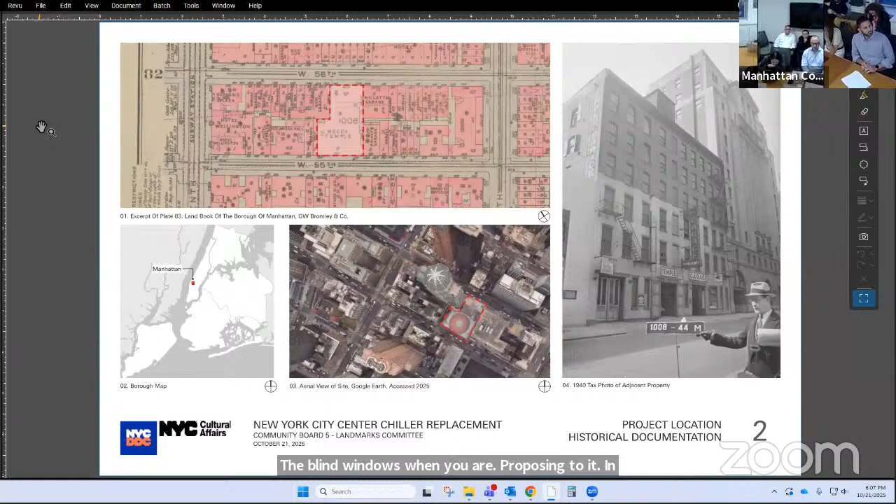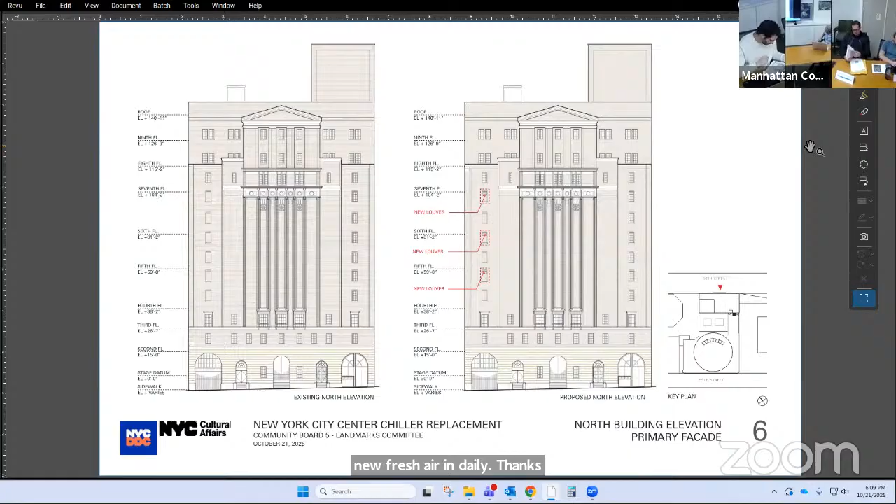On the left is a detail of the product that we selected. It's a fine line louver, also in an effort to minimize the impact. The color of the louver will match the adjacent brick, as shown on the next slide.

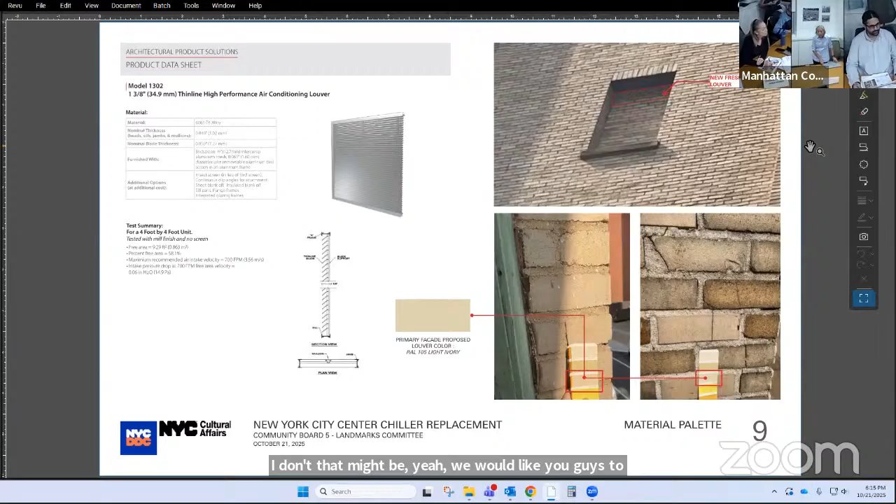But I guess what we could do is have a mock-up and see how it is, if it needs adjustment. That'd be great - if you got a sample and brought it to the building, I'm sure I know you do such beautiful work and love the building and want it to look great. If you put it against it and said, I really like that, I think this is going to work, or maybe we need to work on it - I know that might be something we'd like you guys to consider, speaking for the committee. Certainly something we could do, even if it's not the real louver, we could do a mock-up. Just check it out. Okay, thank you, before we finalize.

Hey, no, this is a lovely presentation. With respect to the color matching that you included here, the RAL - a little louder, please.

Lovely presentation. With respect to the color matching you point out here, the RAL 105 light ivory, will the louver be powder coated or spray finished? That's what we're thinking, powder coat.

Do you have any sense of dimension, like if half of it falls within that shadow line, because that would also perhaps darken the aesthetic, to maybe bring it closer to the brick. The thing is that it's going to change with time, but I do appreciate your point. I think having that shadow line, because it's recessed, would minimize the impact.

I think I agree. Thank you.

I see the mention of an insect or bird screen. Are you guys going to be utilizing that? It says it's an optional feature. Because it sounds like that would be pulled to the facade. No, it would be inside, on the back of the louver. Okay, so you won't see it, just so that they don't get into the louvers themselves. Okay, thank you.

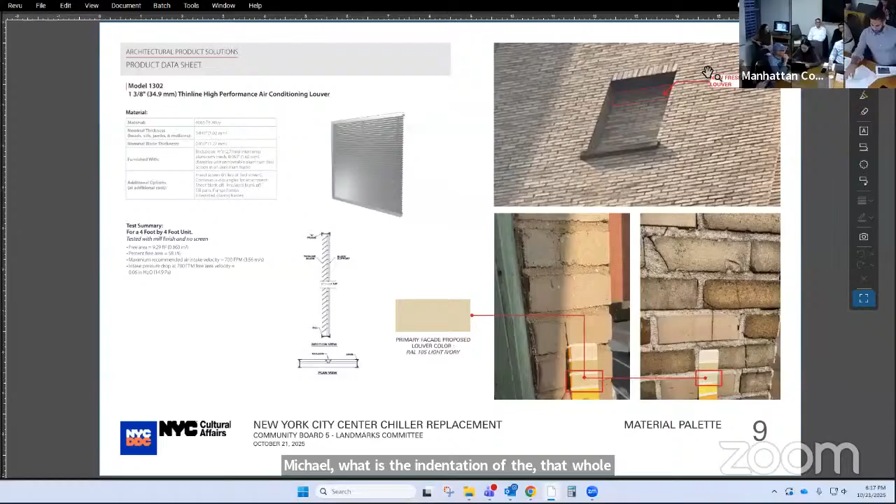What is the indentation of that whole windowless area? How far back does it go before the screens begin? How much brick on the side? How deep is it? I think it's about 6 or 8 inches. It's 8 inches deep. So it's hidden pretty much.

Yeah, it is, and it's going to be the same color. Yes, it's going to be parallel lines.

Which, I rest my case. Henry, well done, hard to argue with that. Any other questions?

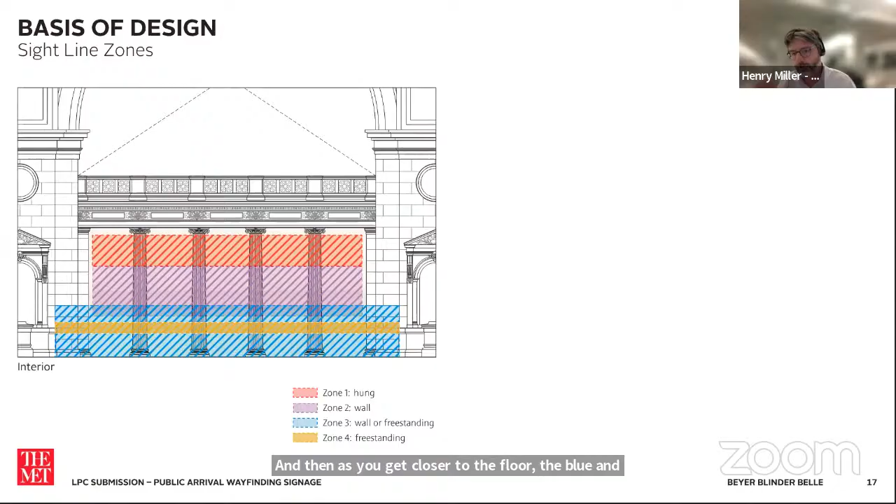So starting the study, we looked at the historic architecture, trying to understand how we can map zones of signage onto it in a sensitive way. You can see the red band at the top, the opportunity for hung signage and banners that you'd see from a distance, and then closer to the floor, the blue and yellow lines for directional signage and more specific wayfinding out of the Great Hall.

We also looked at the historic material we consider the background palette for the work. The Great Hall is Indiana limestone on the interior with a cementitious terrazzo floor. There's some marble and other stone present in various signage, as you can see in this photo.

The existing signage presents a number of different methodologies for anchoring, reflecting a history of different systems at play. We're trying to be very sensitive to the existing stone, so we're not increasing the number of anchor holes or the different hanging strategies you can see here. We're trying to really rectify that.

This is the existing signage plan in 3D. You can see a lot of small signs around the colonnades and around the information desk at the center of the space. We're trying to figure out a way to distribute those more carefully and provide information where it's required. This is the existing plan, and you can see a lot of that signage grouping around the entrances and exits to the Great Hall.

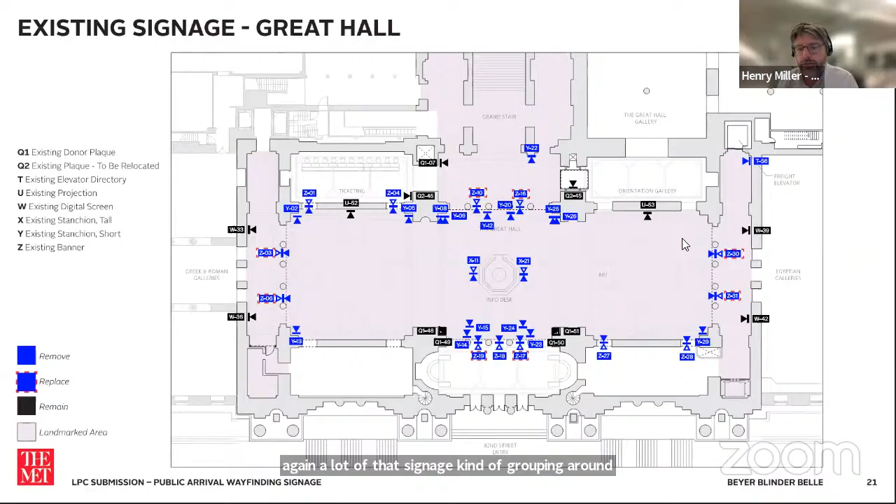And then at the information desk, we're also supplementing the visitor services with digital touch screens, two of those, which would allow users to do a deeper dive into the current offerings, the map of the museum, different languages, and be fully accessible with the listening loop, et cetera, for the public.

Getting a little bit into the specific signage types, which we call the family of signs. We're trying to produce a system of signage that works together, but also works with the architecture. So you can see here that family for the Great Hall.

Quickly from left to right, you can see the touch screen at the information desk, the pylon, the hung banners, and a different variety of banner that's longer and narrower, which works with the return portals in and out of the Great Hall.

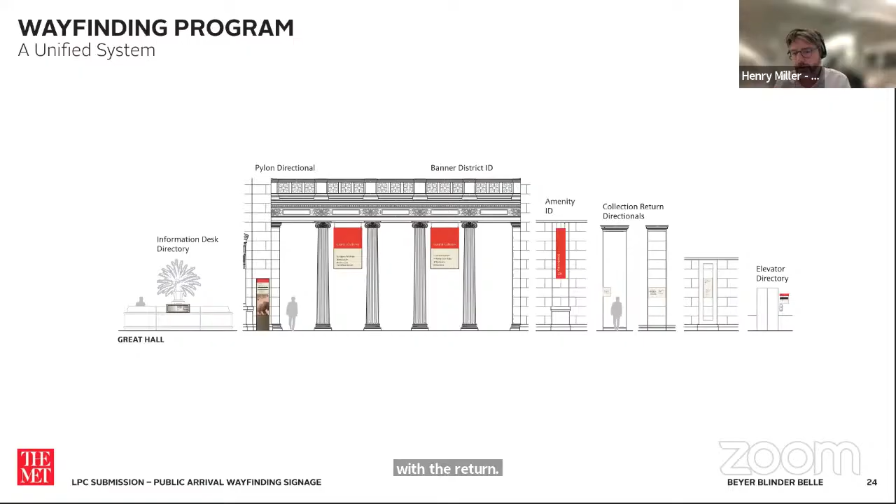On the right are the smaller directional signs, carefully located at stone joints to work within stone proportions. Those are really to help guide you on your way out of the Great Hall into the museum.

Some of the proportions of the banners and signage show how we're trying to hit stone coursing, for example the height of the pylon for the long narrow banner, as well as working with the existing architecture at the information desk. Similar with the directional signage.

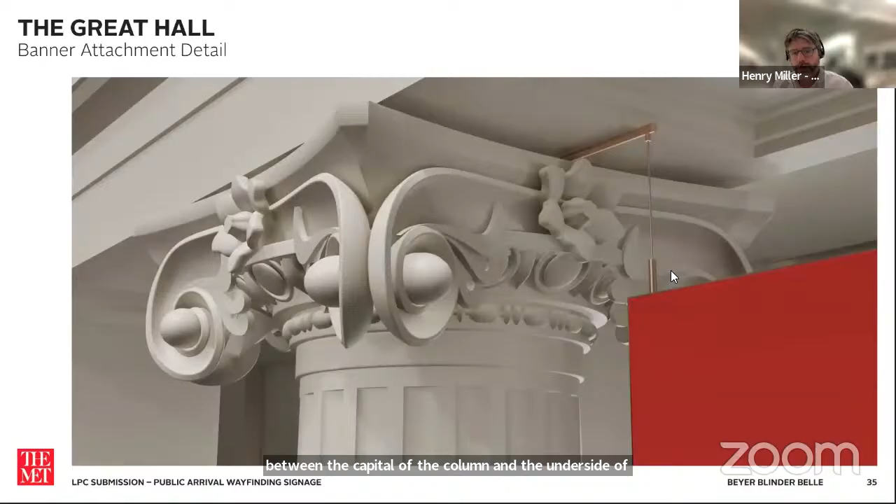To the attachments I was describing, there's a number of them currently being deployed. We're trying to be very specific about how we will anchor things. This is a great opportunity to hang the banners by finding a gap between the capital of the column and the underside of the frieze, where we're able to get some hardware integrated as minimally as possible. We're proposing a frame to these banners, which would be that bronze I described earlier.

We're also looking at a potential alternate, a subtle backlit version of this banner, which we're testing as a way to further let the banners pop out in the very busy Great Hall.

This is the existing directional signage. You can see a number of different types. We're hoping to really put a lot of that information into the pylon.

This is showing the pylon in more detail, how we can deploy it with a lot of specificity about which way to go, but also with a digital display alongside static signage, which would be able to be updated with the latest special exhibitions and whatnot. That would allow the museum to switch that out without needing to switch the signage type.

The triangular form works well within the terrazzo patterning of the Great Hall, and it fits into the corner of the stone pier. This is some detail on how that would be put together.

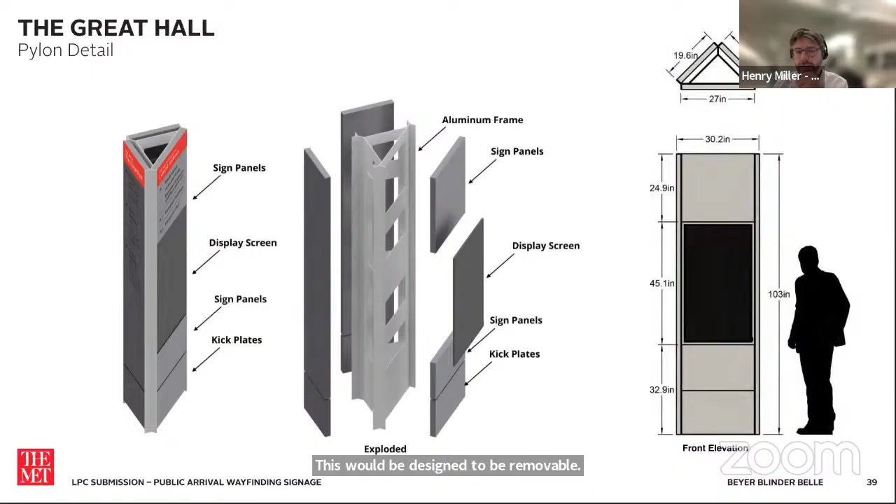This would be designed to be removable, so it would be anchored to the floor, and if the Met needed to take it out, it could without damage to the surrounding.

Similar with the information desk touchscreen, you can see that being deployed here. That would also be removable. This would be supplemental to the existing visitor experience staff, but it would provide the opportunity to really go deep into what's available in different languages, etc. So adding information here without needing to add a bunch of signs.

For the directional signage types, you can see here, for example, we're matching the anchor points of this sign to the grout joints, which is the appropriate place to get the anchor in without going right into the surface of the stone. So we're being cognizant of trying to be as minimally invasive as possible.

And finishing out that family. Part of the work, we're also relocating the World War II plaque to a similarly located wall, a limestone wall, one of the arches.

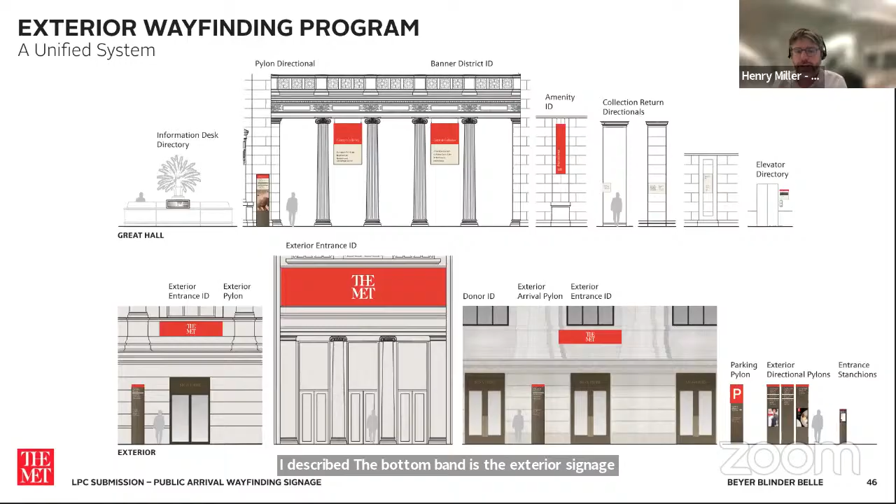Going now to the exterior, the top band is the interior signage family I described, and the bottom band is the exterior signage family. A lot of the same logic is here with the Met red at the banner level, and then more specific directional signage down at the eye level of the visitor.

Same story at the exterior in a lot of ways, a proliferation of different signage types, not very efficient in being able to deliver information. You can see all of those signs here. Our proposal is to really reduce the number of signage types and signs, and put them in the right place so they can do the job they need to do.

That will include providing some pylons out in the plaza to help signal the new entrances at 83rd Street as well as at 81st Street. We'll see as we go through why we think those signs are very important.

Again, similar to the interior, a lot of different sign types at the exterior. We're trying to clean that up and make it more systematic. A similar logic was applied at the exterior to understand where in the architecture are the right horizontal bands to apply signage, both hung and down low. You'll see the exterior elevation on the left versus the interior elevation on the right that we saw previously being a similar strategy.

This is again showing the various signs at the exterior, going into each of the conditions in a bit more detail. You can see the banners above the doors, the opportunity for donor recognition potentially, but more importantly, the pylon types both out at the sidewalk and at the entrances to help direct people to the specific amenities beyond.

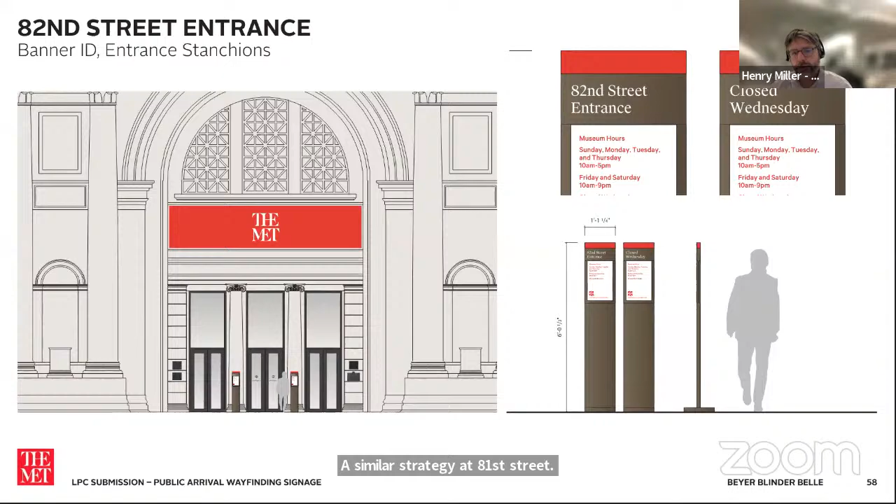Part of this also, similar to the interior, is to be very considerate about how we're anchoring the signage to try to make it as minimal as possible, to anchor into the stone as carefully as we can. You can see some of the existing conditions here with a lot of exposed hardware and ropes and whatnot. Our proposal would be to put a lot of that structure behind the signage and to mount it as carefully as we can so that you're not seeing a lot of the hardware.

So this is the proposal for that, with the anchor points tucked around the corner in the gap between the banners, so they're not as visible.

Looking at some of the signages and pylons that are currently there, there are some existing illuminated kiosks at the curb, which proved to be too far towards the street for the pedestrian. Those are probably more for motorists. There's also some blade pylons present at 81st and 83rd Street, which we're looking to update and unify.

This is the exterior pylon. It's similar in function to the interior pylon. We're picking up on that triangular shape. This would provide also directional signage to each of the entrances, clarifying what you can expect to find there, and also a digital display to provide specific information on what's new, what's the latest exhibit, etc.

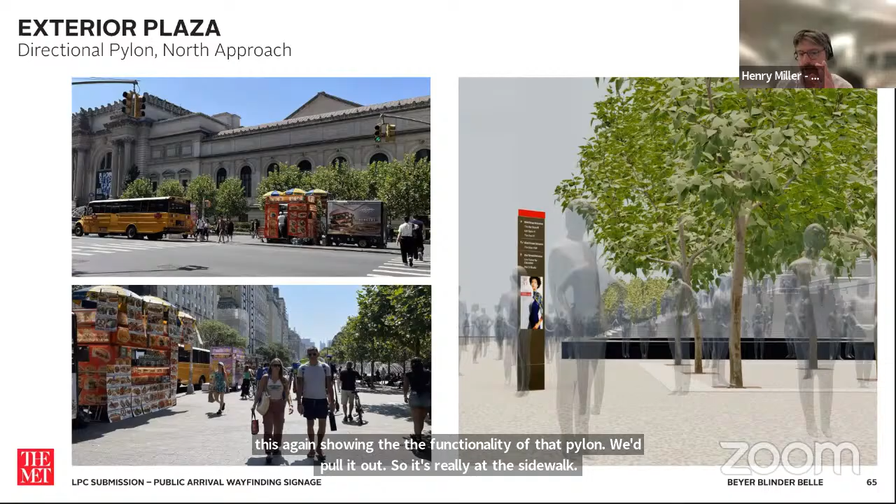Those digital displays would be pointing actually towards the museum, so they wouldn't be something that you would see from across the street, for example. This, again, shows the functionality of that pylon. We'd pull it out, so it's really at the sidewalk and something you're able to see before you get into what's often a crowded area right around the entrances.

How you might then be directed towards 81st Street, similarly at 83rd Street. And then finally, to unify the whole family, we're proposing the replacement of the public parking sign, which is down at 80th Street, with the sign on the right. That would unify the whole exterior signage family in concert with the interior.

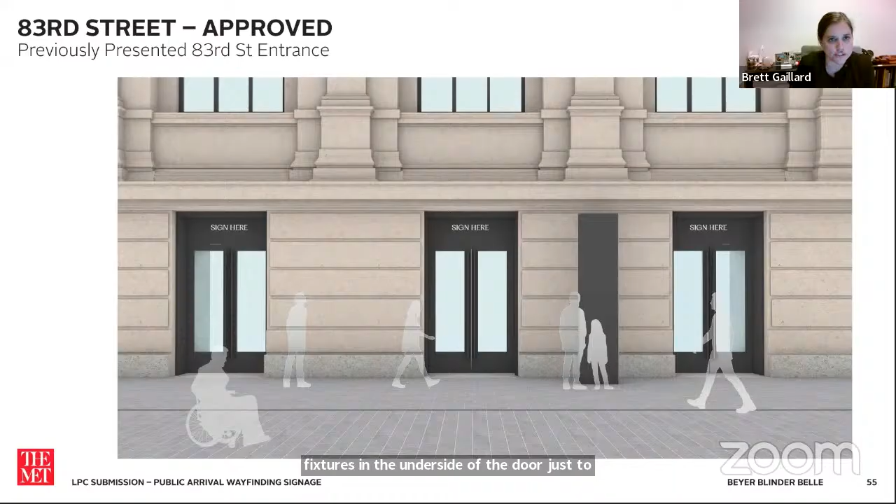There is facade illumination designed to illuminate some of the facade signs, and that would be all we require. Henry, I could add that over the new 83rd Street doors - maybe point to those three doors. When we got the doors approved, there are light fixtures in the underside of the door just to illuminate the signs above, but beyond that we're not changing the lighting strategy in the plaza, which was very well thought through about a decade and a half ago. Thank you.

You mentioned some of the banners being internally lit - can you talk more about that? Yes, that would be at the interior, the banners hung between the columns. It's something we're exploring - we're still carrying the option for no internal illumination, and we're doing a mock-up, so we're not sure yet which direction we'll go. But it's a big space, there's a lot going on, so we're looking for ways to make the signage as clear as possible. That's still in our potential toolkit.

Should we consider that as part of the application? Yeah, I think we talked to Landmarks about this because we haven't decided yet, and we'll decide by the time we have our public hearing. We wanted to present both options and get feedback from the community boards because we're still considering this internal illumination. There's operational and other considerations, and we want to see it in the space before we decide how we feel about it.

One more - any of the digital signs, aside from the patrons one you mentioned, will there be any non-museum related advertising? No, definitely not. We really just try to use them in a static way so we don't have to print posters for every exhibition and put it out there. So the idea is that it's talking about what's happening at the museum.

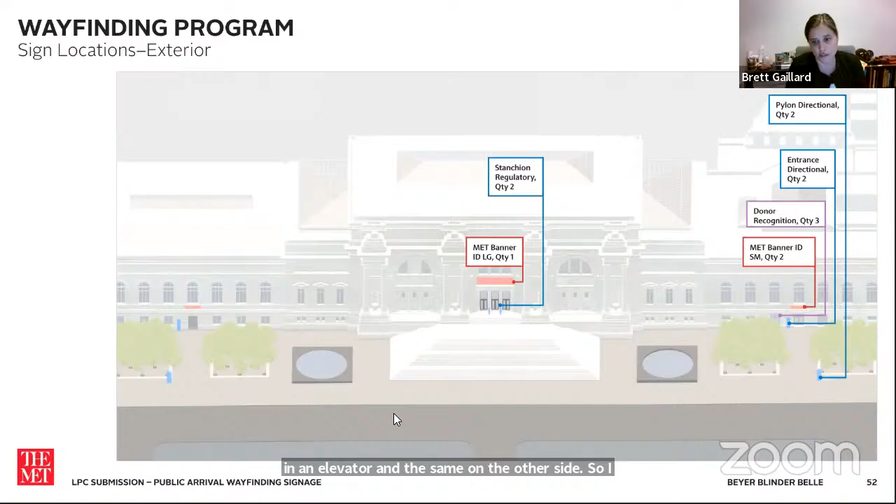So that's why we have the pylon that catches you if you're walking north-south, and then signals that you can go west and there's a door there, so people don't walk by this new entrance and understand it's an accessible entrance too. If you're in a wheelchair or have strollers, you realize you can hang a right there and get in an elevator, and the same on the other side. I don't know if this is the image you wanted to see, but this is essentially what we're proposing over the four city block facade.

No, very helpful. Thank you. Great question, I had the same question about the phones.

Other questions? I think we touched on the system being flexible and adaptable, with elements like lighting of the interior banners, and ultimately how crowds will interface with the pylons inside. Do you envision any kind of pilot or test rollout before everything goes in the ground and signs go up in the visitor center?

Yeah, we kind of do everything here as a slight rollout just because of the scale. Our strategy is to really focus on the new entry and the Great Hall, and the signs that are absolutely required at the base to get people where they need to go. Then we layer on the smaller scale directional signage that Henry described, that tells you can go from this gallery to that gallery. The other reason we roll this out is we need to make sure when a sign points you somewhere, there's another sign somewhere along that journey that gets you to where you want to go. When you're in the Great Hall, you can be two blocks away from the wing you actually want to go to, so just one sign in the Great Hall isn't quite enough. So there will definitely be a phased rollout of this.

I think we see the pylons in a way as a bit of a pilot. We're only proposing to do two or three at the beginning, probably a maximum of three overall, maybe we even start with one. We haven't decided yet, but we would put it in the space and see how it functions. We've done things at the Met, like putting a cone down in the Great Hall to see what people do, and it really changes the behavior in the Great Hall, especially when you have 33,000 people in there at a time. So we will absolutely test it out, but we think this is the starting place, which is kind of why we're proposing this as the framework.

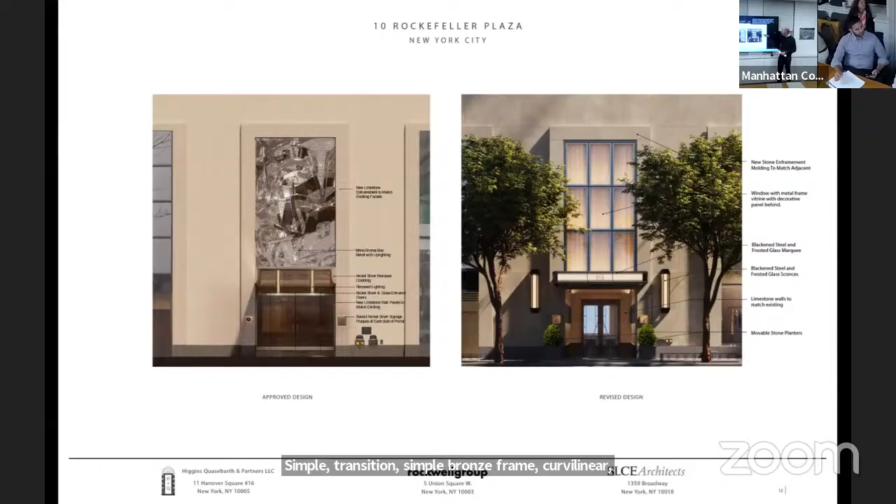This bronze framed panel system with this mesh - we have samples here, happy to pass them around. It's a metal mesh that reads almost like fabric behind glass, and there'll be uplighting to give it a little light. New blackened steel and frosted glass sconces on either side of the entry, and small signage flanking the main entry.

Materials - we have them here, happy to pass them around. Limestone within the entry and granite, bronze doors, blackened steel for the marquee and lighting, travertine across the floor. Materials one would see typically throughout the center.

Comparative sections - this is what was presented previously and approved, and where we are today. This marquee extended out about 2.5 feet further than what's being proposed. You can see this rendered elevation here: limestone panels, sconces on the inside, and granite across the base.

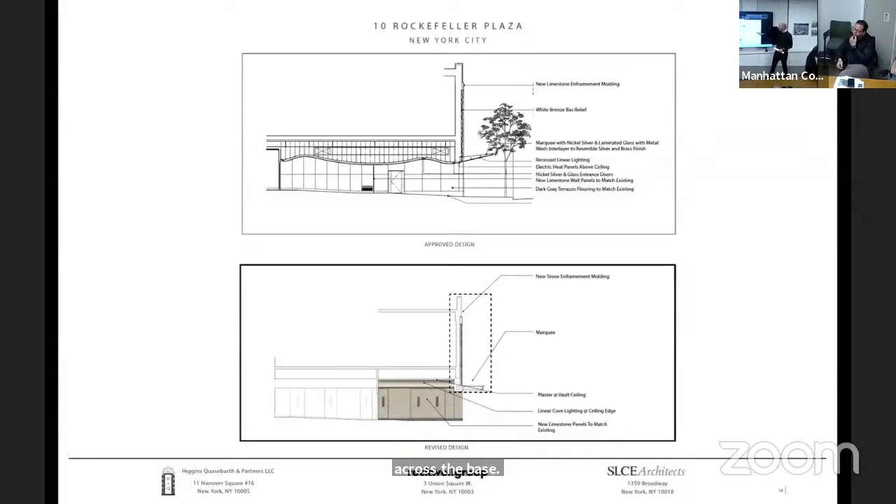I'll mention two comments the committee had back in 2023: one was about the projection of the canopy, and the other was about the undulating ceiling. Both things the committee wasn't happy about have actually been changed. It's now a simple narrow vaulted ceiling, and the projection of the canopy is about 2.5 feet shorter than what would have been previously presented.

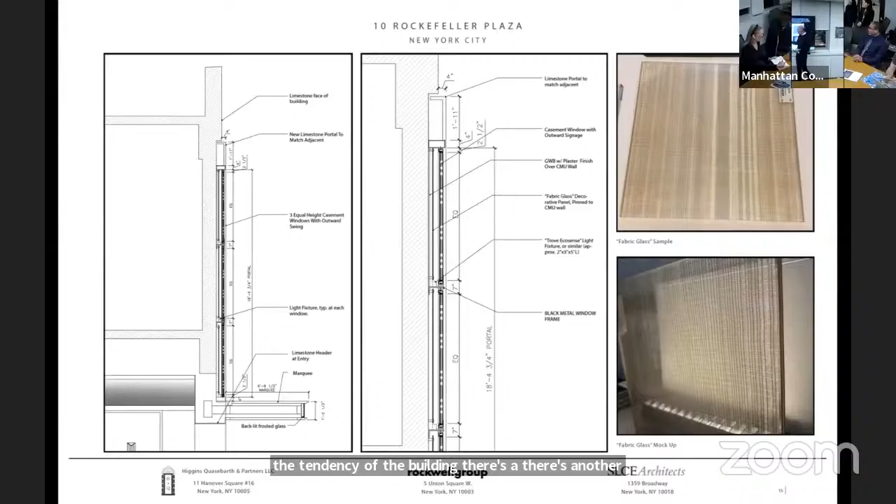Some detailing on that glass panel with the fabric glass you see passed around - it's set into a metal framework. Because of the tenancy of the building, there's another tenant on the second floor with a masonry wall directly behind, so we have very little depth to work within. This screen, or mesh, almost implies depth, but there really isn't any.

It's only about 8 or 9 inches of depth, but there'll be this glass system with bronze mullions. It will be operable to allow access for cleaning, and there'll be very small LED fixtures that just provide a little glow behind this mesh. That will all sit within this very narrow sandwich.

An overall elevation, just to put the work in context of the building. This area is retail use right now. Everything down here had been garage and is now back-of-house office space for other tenants in the building, although the garage still remains down here.

Some details for the doors - bronze doors, deeply set into the entry vestibule, done in statuary bronze. A reflected plan for the marquee itself, extending about 6.5 feet off the face of the building, with coffered detailing, a blackened steel frame, and a limestone fitter.

Comparative plans - again, this is existing, this is what was presented previously and approved, and where we are today. Very similar to what was presented previously, with some changes in materiality. The walls will be clad in limestone with granite, dark gray terrazzo across the floor, and a plaster ceiling.

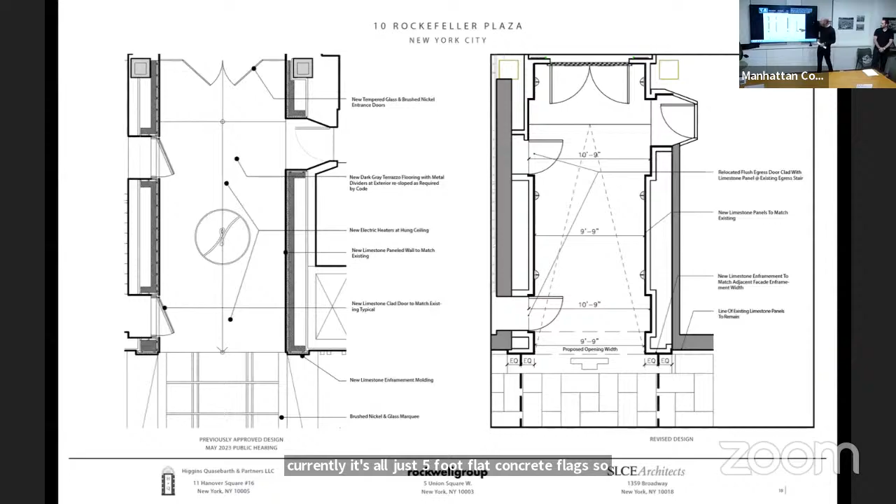I'll also point out that we're proposing a simple bluestone pattern out in front of the hotel. Currently it's all just 5-foot flat concrete flag, so this draws a little attention to the main entry of the hotel in bluestone. Here's the detail of that treatment. In about 2000, the commission approved and installed this throughout the center.

You see a lot of this bluestone paving within the plaza roadbed, at the corners and the individual entries to the buildings. Many of them have bluestone in different patterns, and some granite.

This is a distinct paving within Channel Gardens, which really only occurs there given the prominence of that place within the center. But in this context, particularly on the 48th Street side, where it's just concrete, we're integrating a little bit of stone into that to call out the entry.

This is a rendered plan just illustrating the bluestone. We're proposing to enlarge the tree pits, which will help the two trees currently out front of the building, which are in tree guards that are really too tight. So enlarging the tree pits, bluestone pavers, and then the terrazzo leading into the hotel entry.

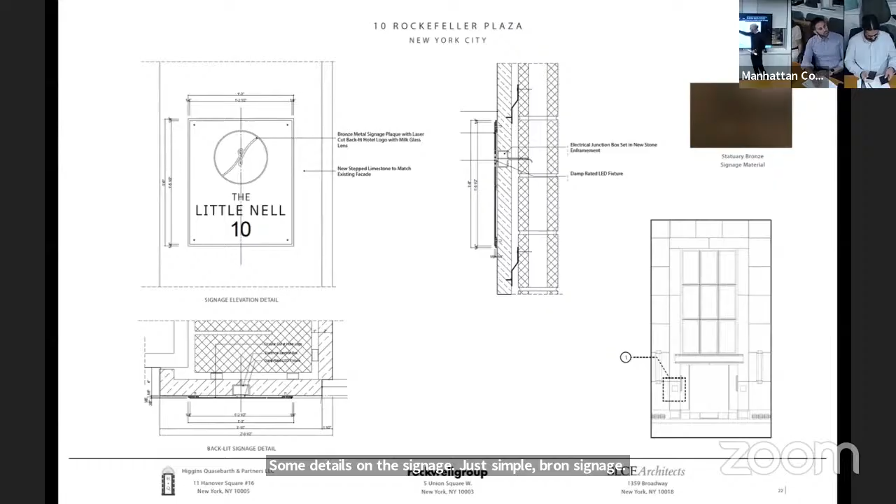Some details on the signage. It's just simple bronze signage. There's a cutout here with a light source behind it, so it'll just be a glow coming through that solid bronze for the hotel logo.

Similarly on the opposite side - the first sign flanks the entry, and the second sign is very discreet. The dimensions are about one foot, six inches by one foot three inches - so 18 by 15. Very discreet signage on either side of the hotel, all in statuary bronze.

Just a few photographs around the center. I mentioned that the base of 10 Rockefeller Plaza comes down to the building with a lot of glazing. This is the main entry to 10 Rock, these tall glass panels, and you can see the corner detail here, these large panels of glass.

And even to the east at One Rockefeller Plaza, you have this storefront infill. So the proposal above this canopy is kind of riffing off on some of those historic details that one sees throughout the center.

This is the 6th Avenue side, at 1230 Avenue of the Americas, basically the opposite side of this elevation. Again, this very light glazed system at the base of the building is very different than what you see elsewhere around the center - similar to this, where the limestone comes down to the street. This building has a much lighter feel at the base, so we're trying to pick up on that.

The last element, just touching on the marquee - historically the center was built with marquees since it was an entertainment complex. 30 Rockefeller Plaza had marquees on either side of both the 50th and 49th Street sides. What was then the Newsreel Theater at 50 Rockefeller Plaza had this very brightly illuminated marquee on the north side of 50th Street. You can just make out this marquee here, the one at 30 Rock.

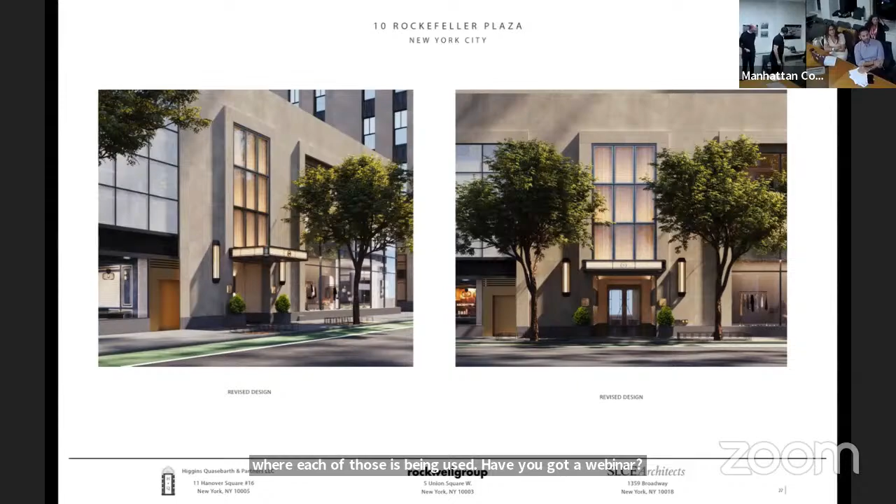I'm gonna let Matt do that since he's designed this, with his team. If you want to go to the material sheet, I think that's... you have to pass these around too, but these are the two samples.

So the black and the statuary bronze, I think the bronze is kind of the highlight that we're trying to use in certain ways that really highlight either the signage, the light fixtures, or the marquee itself. When we get to the window vitrine light box, we're doing a few different versions of how we can use the metals between the dark metal and the light metal to make this feel a lot thinner, a lot lighter, and a lot more graceful and respectful to the center.

So there's a mix of the bronze and the black finish. Black finish mostly on the exterior of the marquee, and then once you get underneath on the coffers, that's where some bronze comes in, on the light fixtures themselves, and then also on the two signage plaques here. Once you get into the tunnel, we do have some decorative lighting as well, that's also the bronze that we have, and then back into the doorway. So really the bronze plays more of a role when you're at eye level, and the black is more for marquee and above.

All right, thank you. More questions?

Could you just put those where they represent all of them? All these, yeah, and that one, and the glass, just so we can have... Sure. So the cast glass or the frosted glass is here for the marquee. It's for the two light fixtures as well. And this will take on a little bit of a different look with the color temperature lighting.

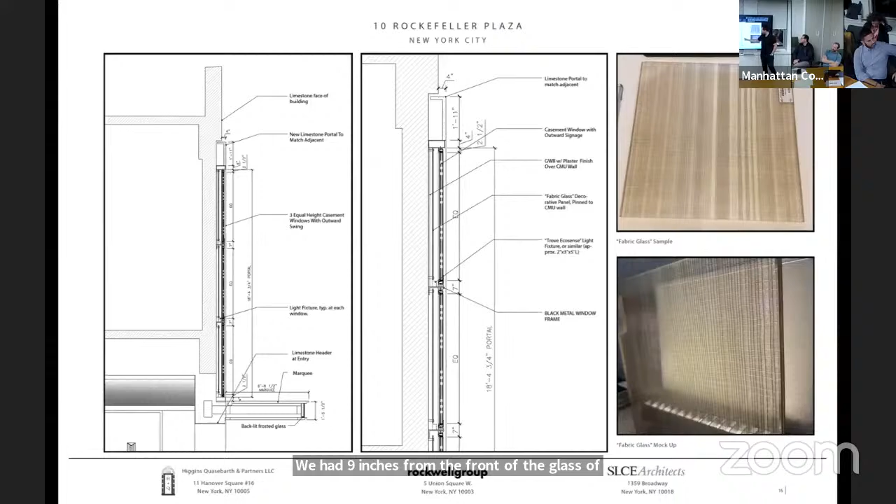How close is that plaster to the glass? Plaster to the glass, so this whole sandwich, from the front of the glass to the CMU wall, we have nine inches. From the front of the glass of the casement window to the front of the glass of the fabric glass is about 4.5. So it sits in between. Can you show them? Yeah, so it'll appear like this, and this is approximately that sandwich, so I'll give you that, it's just enough, we're working with the limited space that we have. But it is set back from the casement windows. The lighting is coming from the inside, and the lighting will be from the inside, yeah.

Just a reminder to address all the questions to the chair, but I just have to back up for a second to clarify a question, potentially an ignorant one. Is this entrance going to be for both the hotel floors and the office floors? No, it will remain just for the hotel. So the main lobby will remain an active lobby. The elevator lobby on the inside is being divided, so the eastern cars will remain office and the western cars will be for the hotel. So all that's happening sort of inside, past the main historic lobby. Got it, so the people walking through this entrance are only hotel guests.

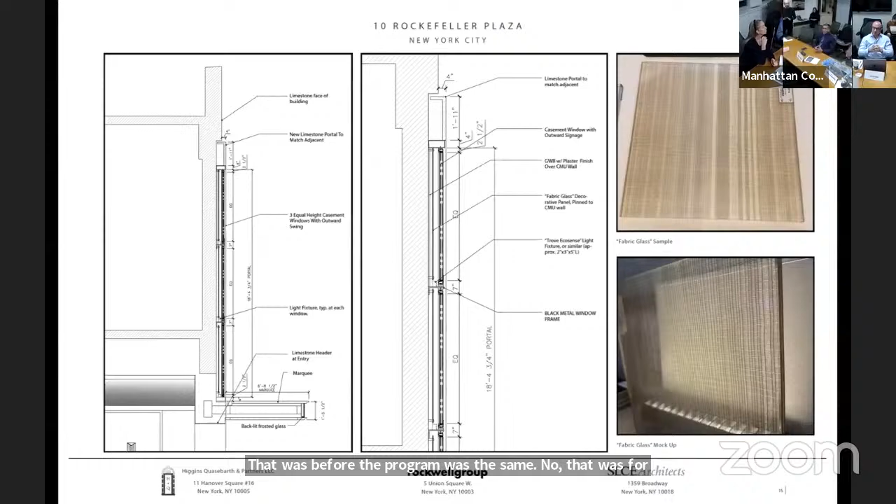Hotel guests. Got it. And then the application that we saw in 21, was that intended to be pure office space? That was before the hotel. The program was the same? No, that was for a hotel conversion, and it was the same project just two years ago. Got it, okay, that's all.

I love the homage, the honoring of all the materials in the area. It's very sleek, it's very elegant, and it's a huge improvement in my opinion. I live in this neighborhood and walk by here all the time, so very exciting, a lot of hotels in the area.

Is there any other signage that we're not seeing, like an exit sign? I was going to ask the door question, because I was wondering, is this a door? But is there an exit sign or anything else you have to deal with that we're not seeing at this time?

At this time, no. There's the header here behind the marquee, and then we have a vaulted ceiling that goes above, so we do have a section there. As we continue locating exit signs and things like that, we have the ability to put that above the marquee on this wall facing this way, so it would not be visible from the street.

I'll clarify that you will be able to go from this entry into the lobby and vice versa, but we can pull it up on the plan so you can see it. There is a door that connects them. It's not that office tenants will be coming in this way and hotel tenants coming in the other way, because there will be a separation right there. There is a connection deep into it.

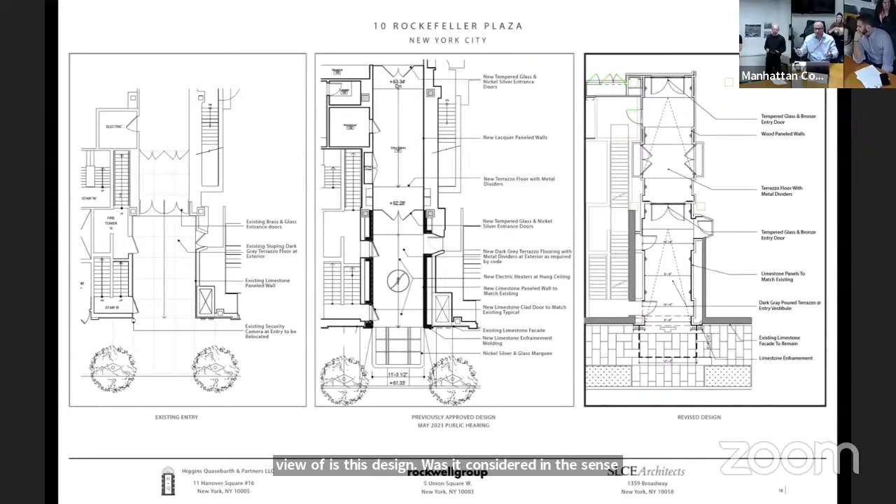Is that the only entrance made like this? Only one entrance you're talking about, for the hotel? Yes, this is the hotel entrance. Like many buildings, there are multiple tenants in this building—hotel use on the upper floors, Christie's has part of this space, and there are other tenants too. Christie's main entry is on 49th Street, the office entry is on the plaza, and this is the hotel entry on 48th.

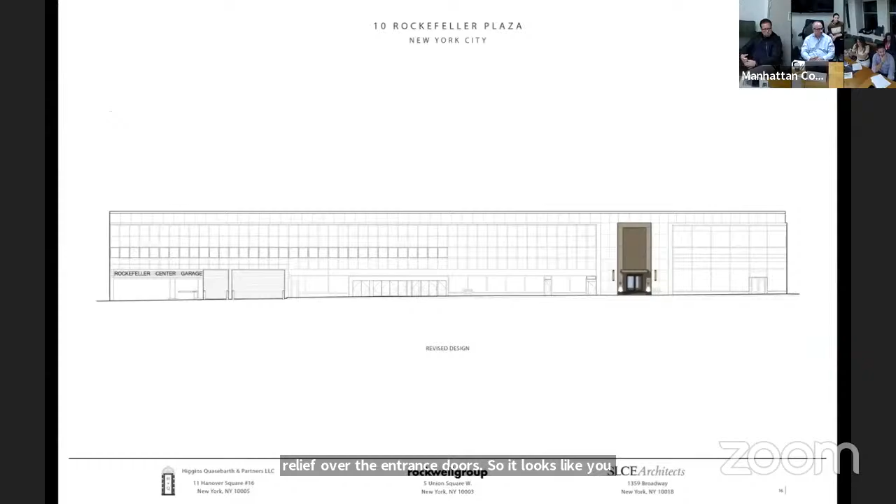I want to talk a little about the clerestory relief over the entrance doors. It looks like you have a new portal in limestone framing that matches the adjacent storefront. In order to get the recessed glass—I know it's not a true punched opening, it's just like a false window, creating the illusion of an illuminated window—are you removing the limestone panel to achieve that detail?

Yes, the limestone would be removed. We have a section detail that goes back to the substrate, which is a CMU wall. So those limestone panels would be removed, and then we'd be treating it—that's what this plaster demonstration was as well. Once the limestone is removed, it's a CMU wall, so we'd put sheetrock on top of that and plaster on top of that, which would be very sympathetic to the limestone elsewhere. That allows us to get the depth we need for this vitrine light box.

So you can see this is flat, unarticulated stone, of which there are acres. Because we've replaced some of these units when there's multiple pin-mounted signage that comes out, sometimes whole units are replaced. This is Indiana limestone, Salem limestone—it's very readily available, and perhaps this could be used as attic stock for patching around the center.

You anticipated my next question, which was whether it has value and can be reused to create those portals, and if not, is it easy to match. Okay, yeah. I have a follow-up question—can you talk a little about the sconces, the precedent of that design, and their size?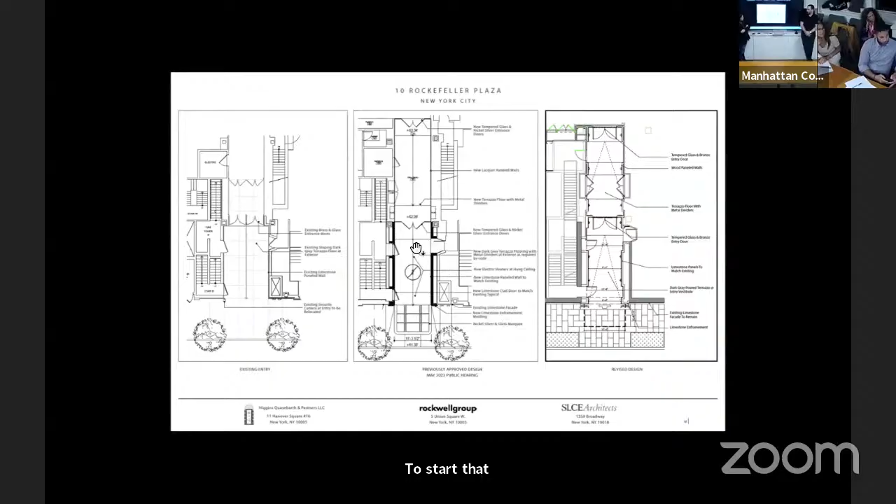To start, the sconces are around 4.5 feet tall. They are above standard eye level, but they are spaced in a way that sits between the joints in the limestone, so they both reflect the scale of Rockefeller Center, and as we install them, they'll sit centered in those limestone panels.

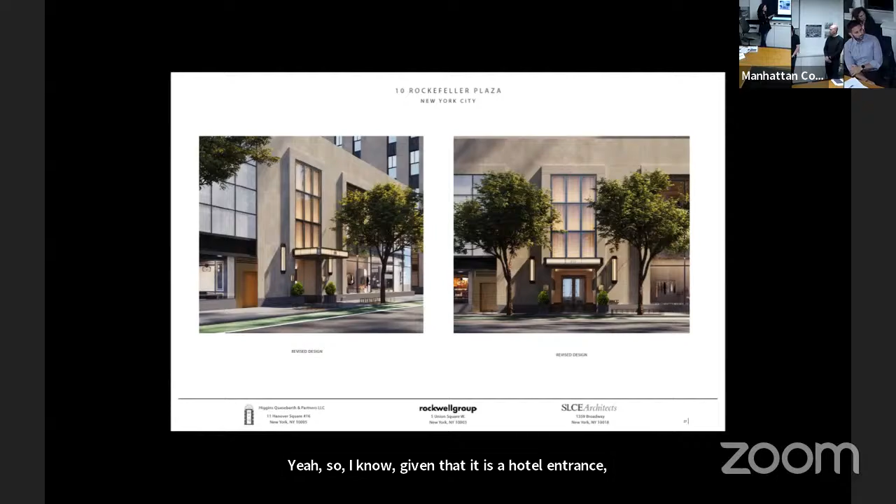Do you want to talk about the inspiration of the design? Given that it's a hotel entrance, we're trying to keep a sense of hospitality when you enter. Even though we've referenced marquees specific to Rock Center, we're also trying to add that entry feel, like you're entering a hotel instead of an office building. That was the intention, and we've tried to further refine them to feel in keeping with what else you see at Rock Center. The marquee drives that, taking cues from others around the center, and the detailing on those light fixtures picks up from that as well, creating one cohesive design.

One last question. I saw two of the dimensions on the marquee, but I don't see the height. What is the height of the marquee above the ground? 11 feet, 2 inches. We don't have that in our deck, but we can send that to you. Yeah, it's over 10 feet.

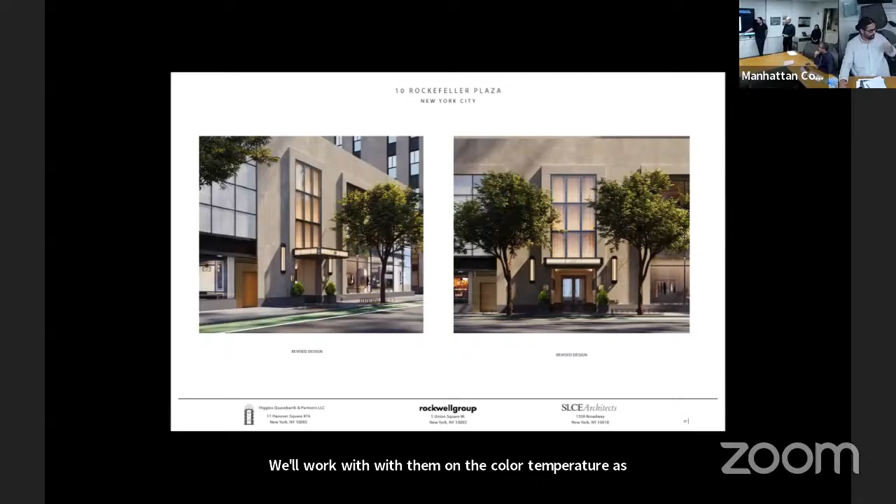What will the color temperature be? It will be around 2700. We're working with the lighting designers currently to find the exact spec for the fixture that will be best for this, and we'll work with them on the color temperature to make sure it highlights our materials as well as keeping in line with the rest of Rockefeller Center. There's still a little bit of fine tuning to do, but it'll be around 2700. The aim is for a warmer, incandescent feel. Exactly, it'll be warmer, yes.

Who's that? I was just going to say thank you for taking care of our area trees.

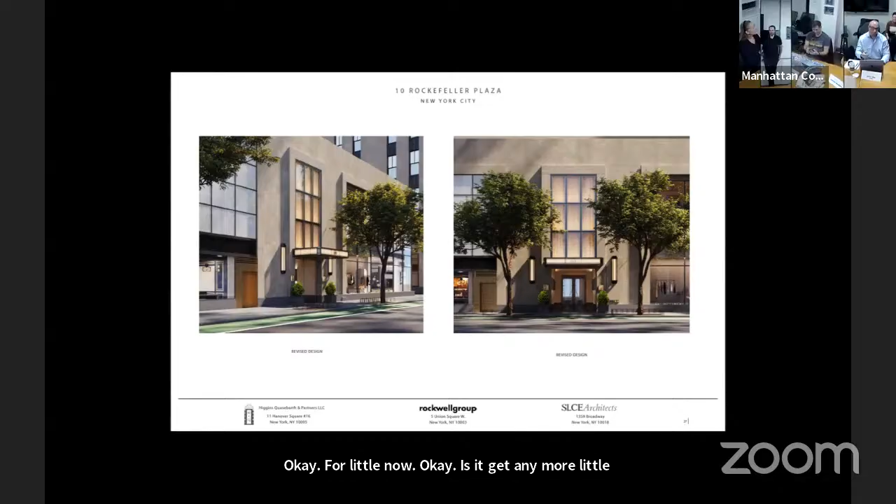Can we get the name of the hotel company that's putting up the hotel? Sure, it's the Little Nell. Oh, at Aspen, yes. What is it, Little Nell? Very chic. Is it going to be called the Little Nell here too? Yes, but it'll be called the same in New York. It doesn't replicate the Aspen design, it's taking a note from Rock Center, not from Aspen.

Correct. Yeah, the marquee — in theory, if there was a change in ownership and a different hotel came in, how would that impact the marquee? Would the color change, or are you committed to that color scheme, or could it change? And if it changed, is that something you could do on your own, or would you have to come back to Landmarks, even if it's the same hotel company but they change their branding colors? No, the metal, the glass, and the lighting would all stay the same.

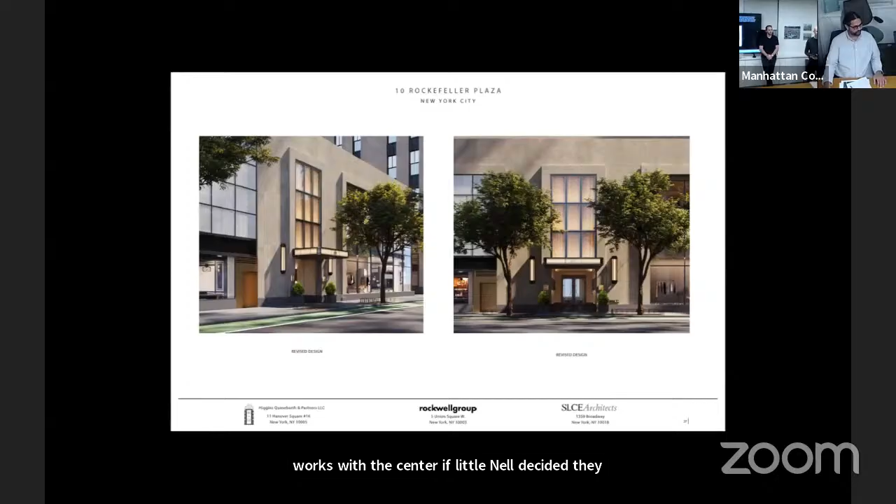It's a very neutral color scheme that works with the center. If Little Nell decided they wanted to be green instead of red, it wouldn't change the exterior metal work or the limestone. Most of the materials on this facade match the rest of Ten Rock, so there would be very minimal change — the signage would be red, and maybe those two panels, which are bronze, and that's how we're designing and keeping them.

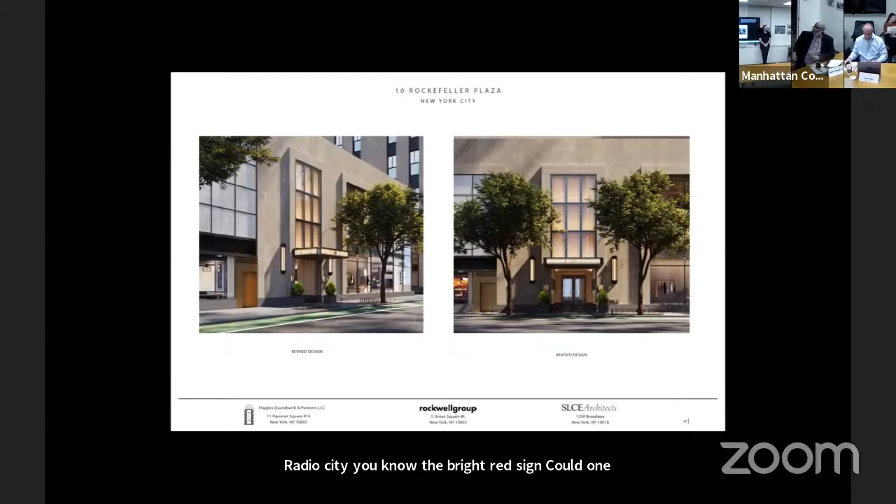I think what you're asking is if somebody else wanted to change the light in it, they could — is that what you're asking? Yeah. Right now everything is blended, but let's say like Radio City has the bright red sign — could one day the lighting change? I think Landmarks are required to come back either at staff level or to you all if there was any kind of change to the finish of the signage, for sure. Any change to the signage would require a new permit.

And I don't think we would spec color changing of lights, so I don't think it would be an option. That, again, is something we're reviewing.

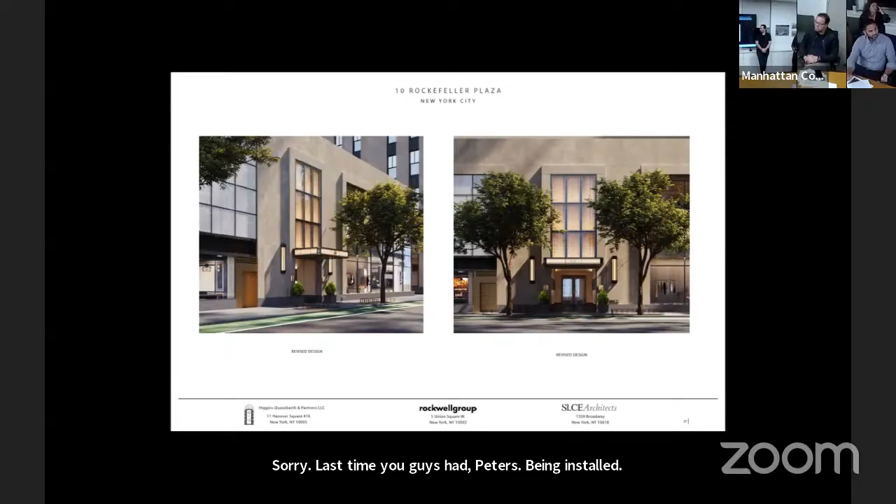Last time you guys had heaters being installed, are they going to be installed, and will they be mounted on the underside, under the marquee? They'll be inside, so in plan, once you cross the threshold of the limestone portal, they'll be inside there. We're working through the coordination of exactly where those will be, but they'll be on the ceiling in there.

Not under the marquee, they'll be in the throat of the entry. Can you go to the elevation that shows the inside of that hallway?

Yeah, so they'll be tucked up here, so you'll have entered this sort of hall going into the vestibule, going into the hotel, and they'll be tucked up at the top. I think we're gonna have two or four.

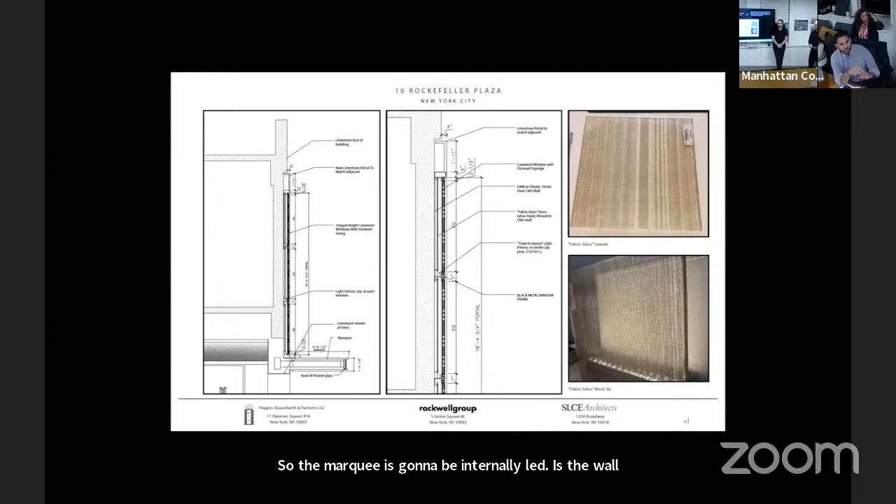So if we can go back to the other photo we're on, just talking about exterior lighting, so the marquee is gonna be internally lit. Is the wall itself with the curtain glass, will that have lighting in it? Is there any lighting on top of the marquee shining up on the facade? No, everything that is illuminated above the marquee is internally illuminated in that sandwich structure. Is there any downlighting underneath the marquee coming out of the sidewalk?

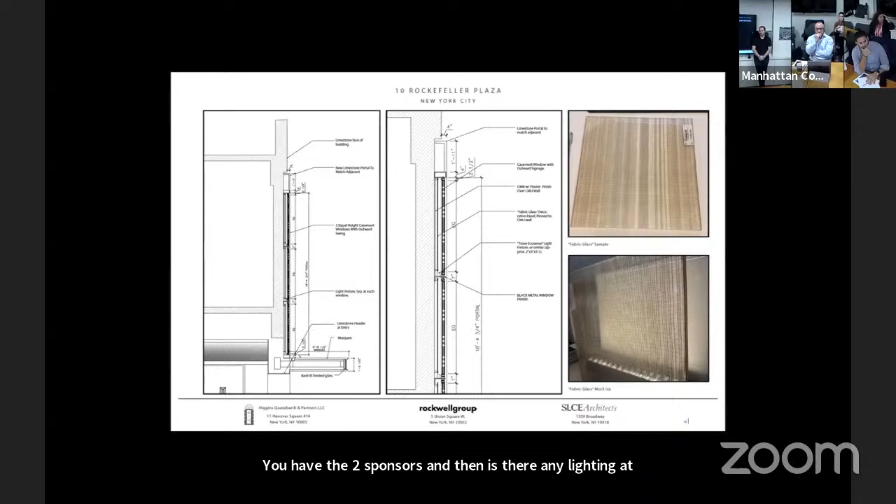The marquee, we're showing some coffers that are uplit, so you will have some light that is coming down, but nothing is being spotlit down. You have the two sconces, and then is there any lighting at all on the plaques? There's a subtle glow just to set them apart from the limestone. And they're backlit? Backlit. Okay, all right, thank you.

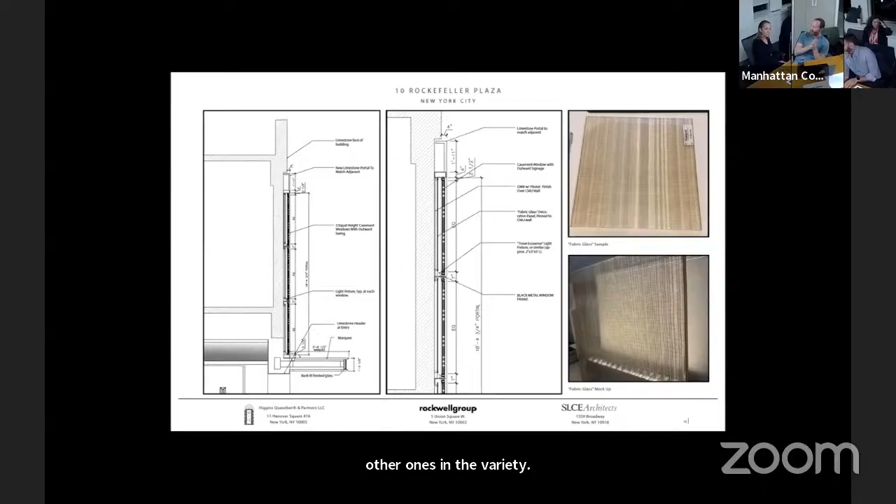How does either the plaza or the building think about consistency with this, aesthetic consistency relative to other entryways? It seems like Ten Rock is a very unique building relative to some of the other ones in the variety of entrances there are and how it looks. Tell me more about what that process is like in terms of how you're coming up with this and trying to reference it with the other entrances and other parts of the plaza.

Let me start that a bit. So, depending on the building, there's like 45 Rockefeller Plaza where Atlas is out front on Fifth Avenue. That building has probably six different entry points, and I think they're all different. So each building, there's obviously a real sense of place there, and there's a continuity of materials and some detailing. Many of these buildings have very distinct qualities, particularly how they hit the ground. So Ten Rock, as you noted, has very different entry points, and some of the other buildings do too.

So I think the idea here was to take what is a very simple, understated entry on the back, the back of the center that faces this very commercial - I don't know if you know 48th Street, but it's the south side of 48th Street. Looks just like Midtown, doesn't have much character to it. So the idea was to take this simple entry and turn it into something that isn't competing with the other components of the building, but has its own personality.

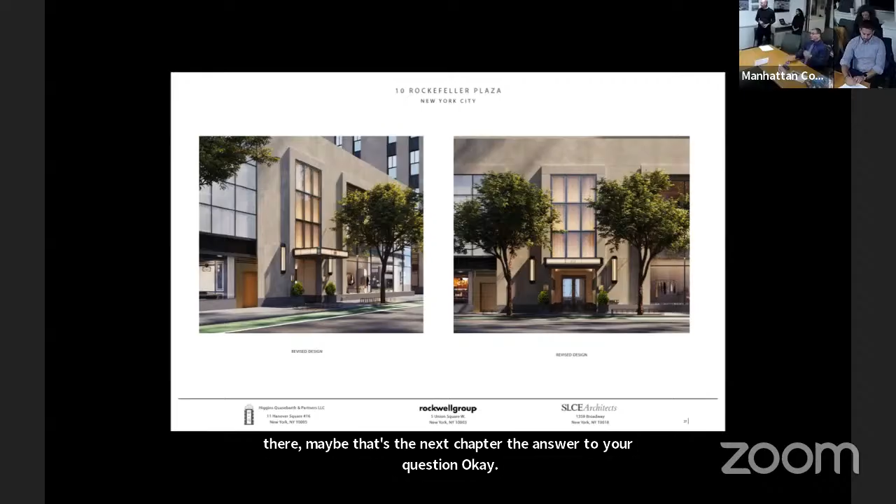So in terms of where the team went from there, maybe that's the next chapter of the answer to your question. Starting off with just the storefront grid, that's something we see along that entire 48th Street. What we've designed is something that maybe reflects more of that hospitality brand than say the Nintendo store or the parking garage. So we're taking elements from that facade and reworking them a bit so that they are still in keeping with the facade as a whole, but more closely reflect the new space that's going in here as well.

And with the marquee design, we really took it on from the Radio City marquee, which is much louder and brighter, but there is that rounded edge, and there's a thickness to the lines of it, and the shaping of the marquee itself.

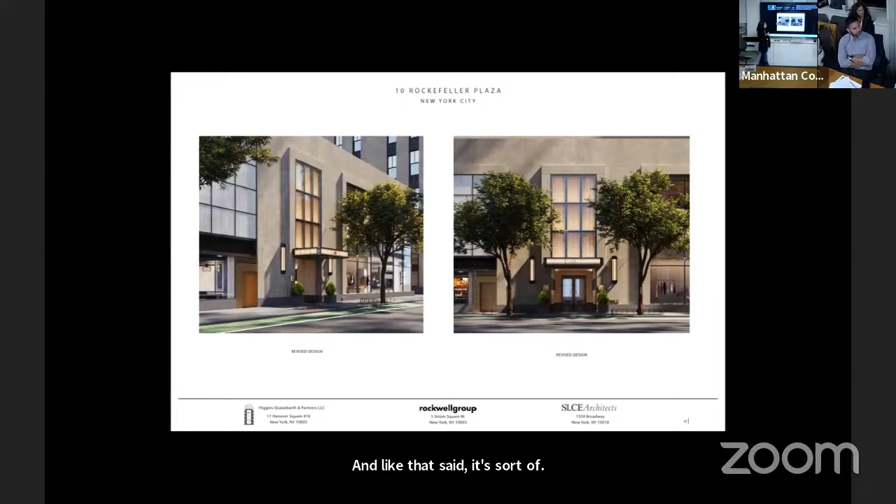We took a lot of cues from that part of Rock Center, and we continue to refine this down so that it becomes a glowing beacon for people coming to the hotel, but it's supposed to be very subdued. This storefront is very much in keeping with what's on either side, but it has that little bit of elevated hospitality feel to it.

Just to mention, the entrance is between a Nintendo store and a parking garage, so there's a balance here. You want to draw attention to yourself, but not too much. You want to be welcoming and have it be a signal to the guests who are coming, but not overstated.

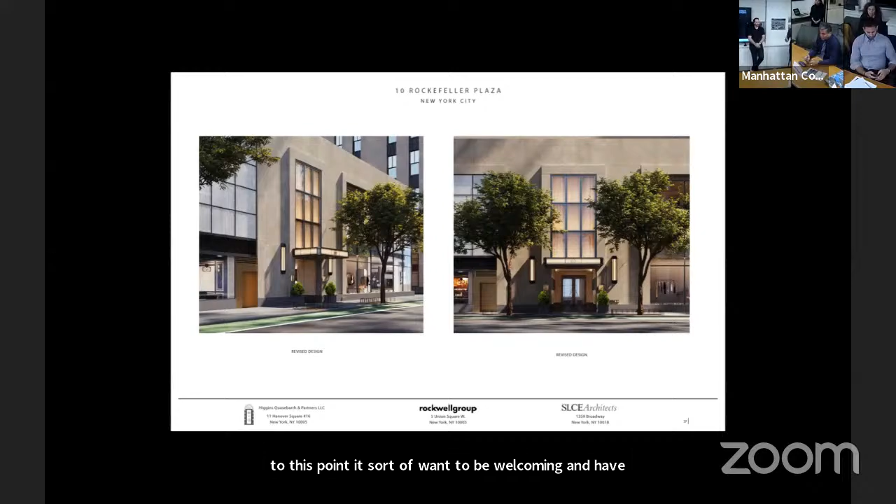Okay, Wes, I know we talked about the undulating ceiling that's gone away. Could you remind us what the interior lobby looks like and all the changes compared to the last design? So the proposal for the hotel lobby—go to the next one, if you go to the first sheet where we get the plan.

So we're going to zoom in on this. This is the main lobby off of the plaza. That stair that goes down to the concourse, the murals around this—no change there.

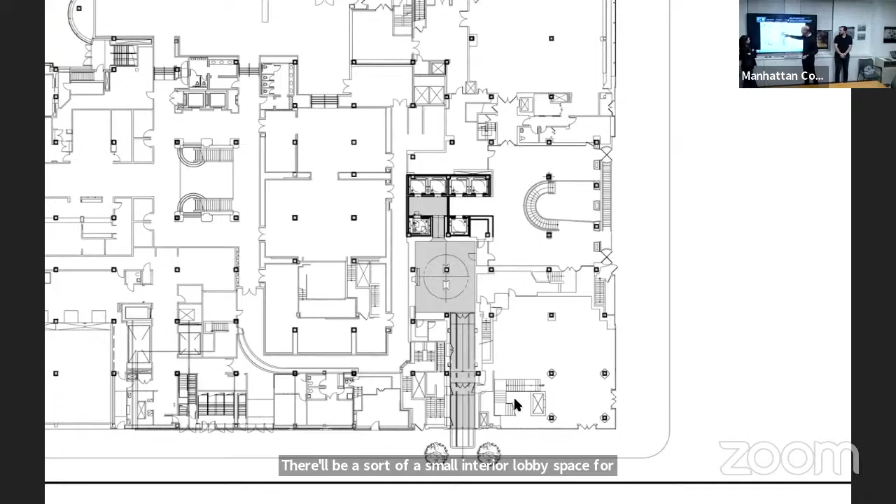This is the elevator lobby presently. So the entry to the hotel is going to be up through this passage. There'll be a small interior lobby space for the hotel, all interior space, not designated, and that'll lead to the elevator lobby. As part of this, one of the cars has been taken out, and you pass through the elevator lobby into this smaller elevator lobby to access the upper floor.

So this is really unchanged from the previous design. The circulation is very similar to the way it was two years ago. It's really just the detailing on the outside, the elimination of the artwork, the elimination of the up lighting on the artwork and the down lighting, changing the marquee, and some changes within that entry portal from what had been kind of an undulating ceiling to now just a simple barrel vault.

Got it, thank you. Yes.

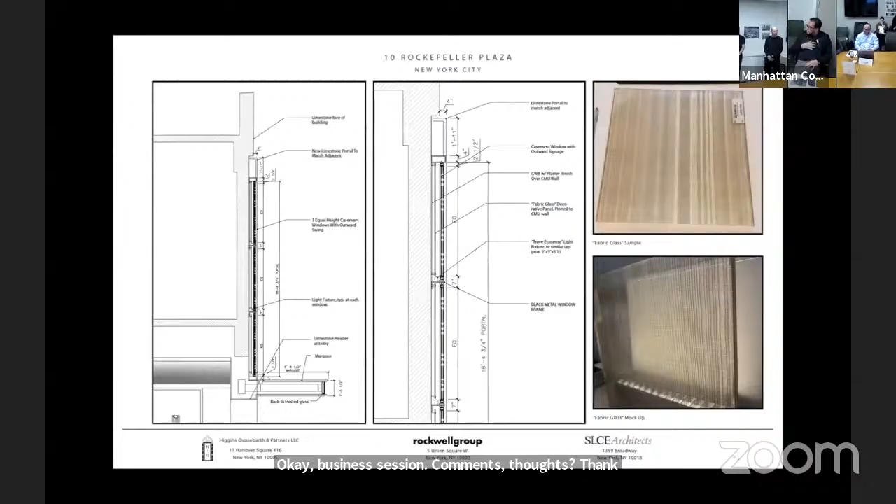I just want to compliment you on the whole presentation. You guys did a terrific job, and we appreciate you bringing the samples. We're always curious what the samples look like. I just want to tell you, you did really good work, and it looks great. Thank you. Agreed.

Any other thoughts, comments? Suzanne? I'm on this block all the time. I think it will be a lovely addition.

Great. I think it's a very elegant design and solution. I like the way the proportions align with the Nintendo store adjacent, and how it frames the archway. I think the materials they selected are very appropriate and elegant, in keeping with the Rockefeller Center layout. I think they're going the extra mile by even improving the bluestone paving and bringing it out onto the sidewalk.

So for all those reasons, I'm in favor. I agreed with what was mentioned earlier—a lot of the entrances throughout the center are very different. They're all very interesting and very cool for different reasons, and they're very much Rock Center. So I don't think having something that's different is necessarily an issue here.

I do agree with Karen that the material choice is very appropriate. I'm interested to see the bronze and the black steel together. I understand what they're trying to do—I guess we're so used to seeing bronze everywhere throughout doors and whatnot. There's a lot of lighting, and I think it would be kind of nice to see it toned down a little bit, but if it stays a warmer temperature, it seems to make sense.

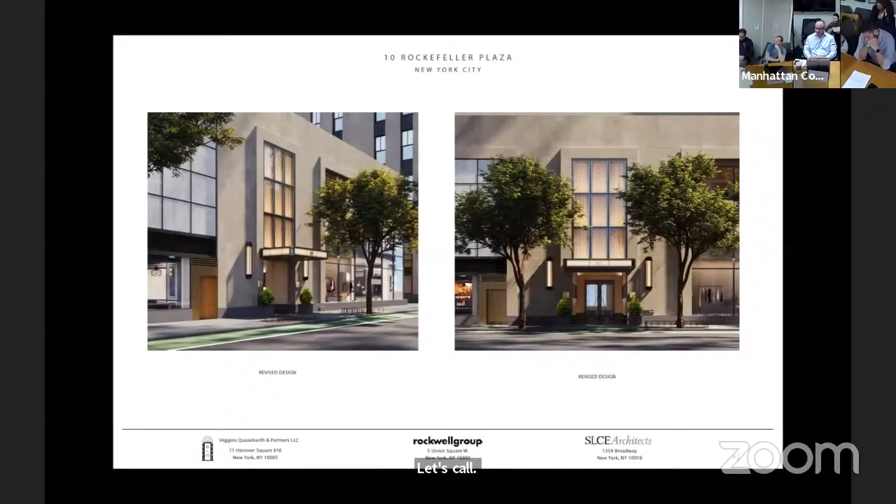Last call, anyone want the final shot? Can I get a motion? Motion to approve? Second. All right, Fierstein, yes. Klein, yes. Frizz, yes. Harris, yeah. Payback, yeah. Yadovich, yes. Hagan, yes. Cal, yes. Huckman, yes. Johnson, yes. Strazi, yes. Testa, yes. Motion is approved.

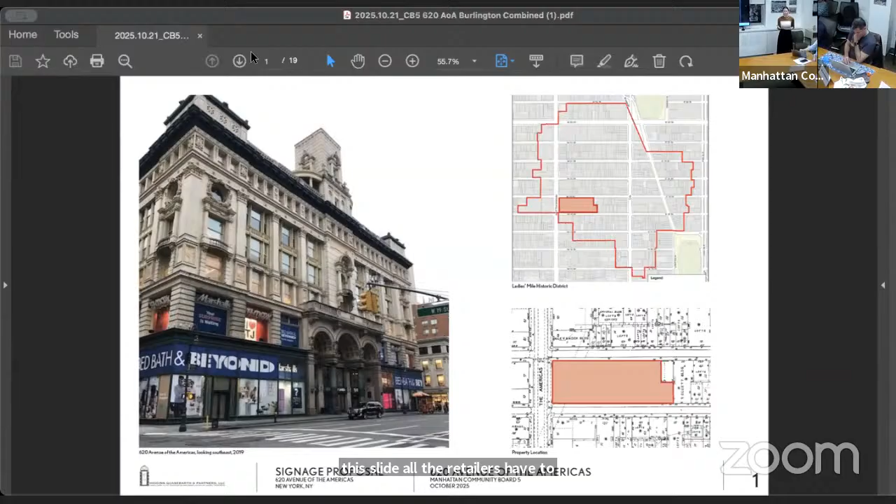I do want to mention that the lower floors of the building house multiple retailers. You can see in this slide, all the retailers have different types of signage. The idea here is that Burlington will be adding their own new layer to this.

So what we have on the screen here is the main entrance to the retail spaces—kind of a communal entry for all of the retailers. Burlington's new store will be accessed from this location. The center doors, where Bed Bath & Beyond was previously accessed and where their signage is, will become a new signage location for Burlington. All of this signage is dimensional, non-illuminated signage installed at those sign bands above the doors. So the signage there will just be replaced in kind for Burlington.

Just as I was mentioning, the grand proportions of this building and of the storefronts—you can see the person under the TJ Maxx sign is very small in relation to the overall scale of the building.

These photos are showing the prior condition of the building when Bed Bath & Beyond was still in the space. As you can see, they had a significant amount of signage—inside, outside, a lot of partitions installed within the windows—and it really limited visibility into the interior of the space. The upper floor tenants also had very prominent exterior signage on the building. Burlington's proposal is really aiming to open up this corner again, creating a more visible storefront condition, which it has not been for a very long time.

This brings us up to our more recent conditions. Let me point out here: this northern space, which is the entire corner of 6th Avenue and 19th Street, extending all the way almost to the end of the building on 19th Street—Burlington is taking over that entire retail space. So again, it's a very large space. They're relocating from their current location up the block. You all know it. So this is going to be a new store, a really important location for the company, obviously a very prominent location.

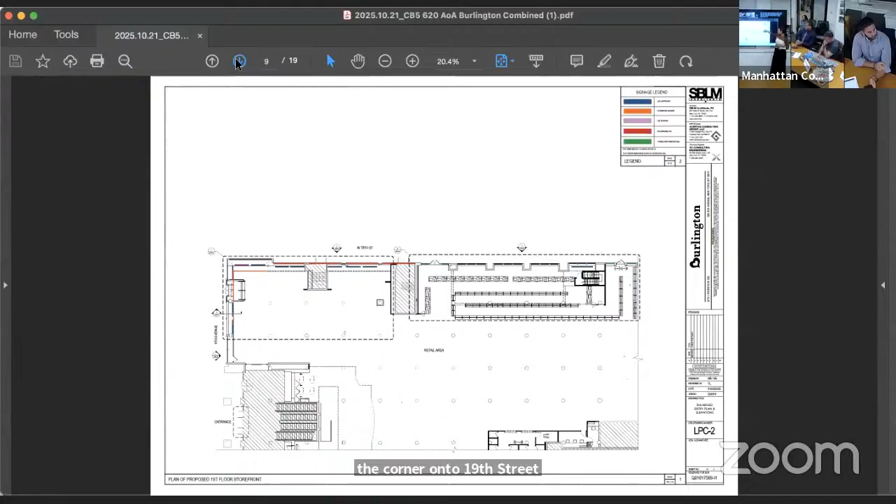So as I mentioned, the main entrance to the store is actually going to be off of 6th Avenue. So there's going to be one new exterior non-illuminated sign installed on the exterior. This is the main entrance to the store. And then this is the rest of the store plan. It's a lot of space, a lot of frontage, and the bulk of the interior signage is going to be located along the corner here on 6th Avenue and then rounding the corner onto 19th Street. And then there's a single interior sign installation located a ways down the block on 19th Street.

So the interior signage includes light boxes, which are static displays of imagery with a little glow behind. There are going to be two display screens, so typical LED screens that might display more moving images or static images. There's also going to be facelit signage installed at a soffit at the transom level. And then there will be localized installations of window film as well.

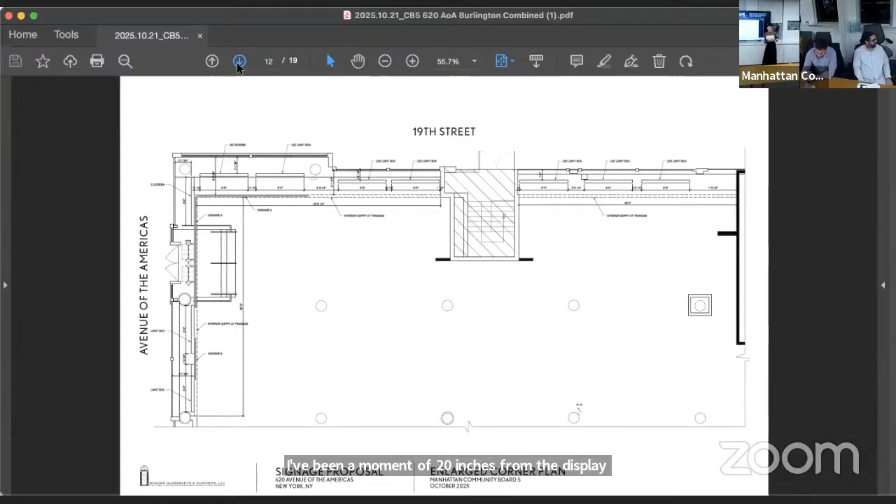There's a lot of information here, I'm happy to come back to it. But at a high level, everything is set back a minimum of 20 inches from the display window, ranging between 20 inches and about 3.5 feet. So there's going to be a lot of breathing room behind the display windows, everything set back, and nothing going to the top of the display windows. There's going to be visibility above and around all of these installations.

And then this interior soffit line you see here in the dashed line is an interior construction that LPC has already approved. The plan for the facelit signage is simply to install that onto that soffit.

Again, that film will be red, that's Burlington's color. The other facelit signage will be dimensional, but again, installed on that soffit.

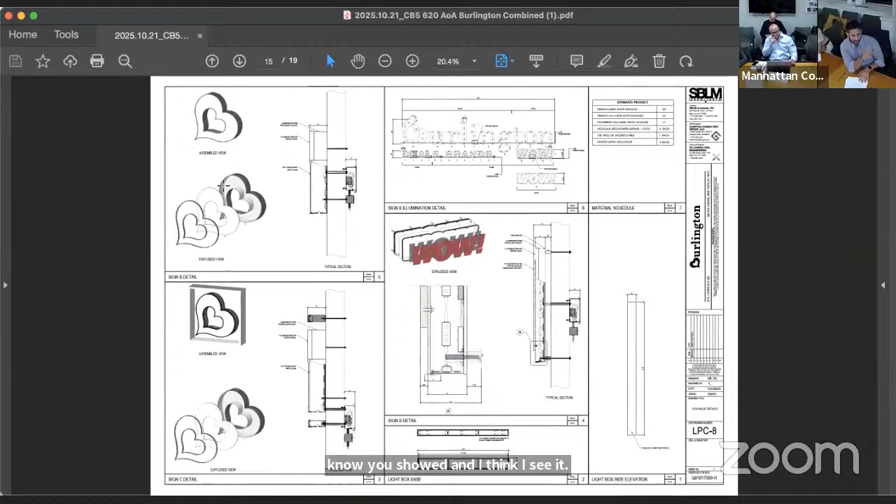When Bed Bath was there, there was another entrance on that side street on 19th Street. It looks like you have a small sign going back that way - is that going to be used by visitors to the store? The only entrance is actually through that center entry on Sixth Avenue. All of the other doors are there simply for egress, code required. That door on 19th Street is an egress door, so that's not going to be an entrance door.

So the signage you have back mid-block, it's not for folks coming in and out that way? It's strictly because there's a space available. It's identification, and if there's a service access or anyone needing to go to the back of house, it identifies that. The light box is for passersby, so they're not main entrance doors, but because there's a new egress stair being constructed behind, instead of just seeing a blank white wall, it's an opportunity to add additional signage.

Just one more, to clarify, because I think I know the answer from dealing with this building before - this building does not have a signage master plan, correct? It does not. It has a storefront master plan, which you probably saw back in 2019. So yes, there's a master plan for the entire base of the building, but signage was not included in that.

Sure, so there are no changes to the storefront? No changes to the Burlington storefront. Maybe this is for comments, but it seems like a missed opportunity that there's a master plan for the storefront, yet they're not following it. If they had, the sign band would be consistent, a datum that wraps Sixth Avenue and 19th Street. Because they're not electing to change the storefront, we have these giant signs now up in the clerestory. It's just not consistent.

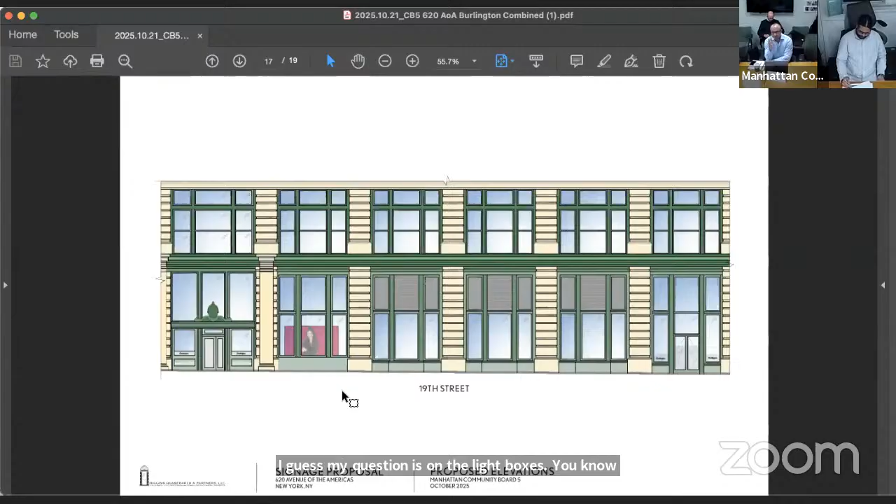I guess my question is on the light boxes. I understand there's been signage on this building since forever, but I worry that the light boxes are kicking it up a notch. Was there any alternative considered at any point, either vinyl coating or something a little more subtle? No, this was really the intent from the beginning, to have the light boxes.

This is something Burlington uses throughout their stores. It does allow for changing out imagery more easily. Something to note, you may have picked up on this - our draft originally did show additional light boxes at these 3 windows, and those had actually been removed from the scope.

We're using the light boxes here traditionally because Burlington has to have fixtures around the entire perimeter of our store to make enough money to just be viable. But because the storefront is so beautiful and we wanted to keep the glazing as opposed to putting a window display wall, we have the light boxes up against fixtures, taking up the same footprint. From the inside, you see fixtures; from the exterior, you see light boxes, so you don't see the back of a fixture. We use them so we could avoid building a wall there and keep the space open, so you could have visibility into the space because it is so lovely.

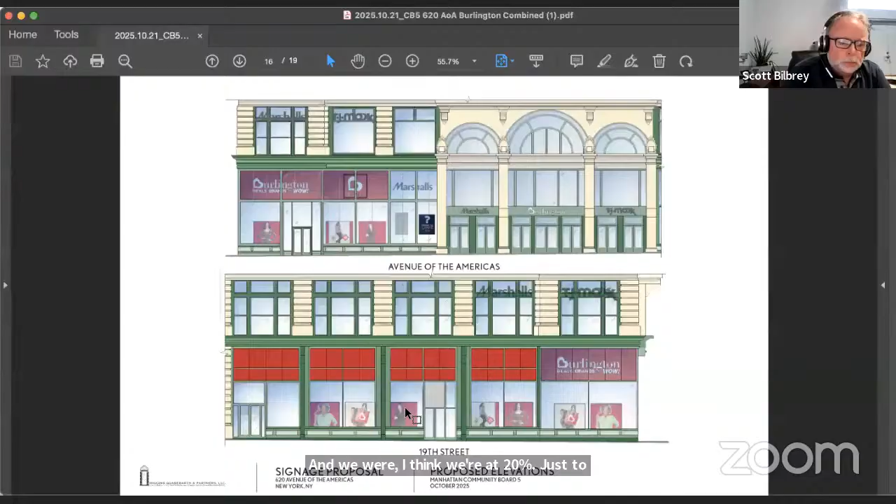Just to add, the Bed Bath space that's being vacated was about 90,000 square feet. I believe they're taking at least 80,000. Is it 80 or 40? It's not another full tenant going into the south space, so it's 40 — right, it's the northern half of their space. But the space has been vacant for a number of years now.

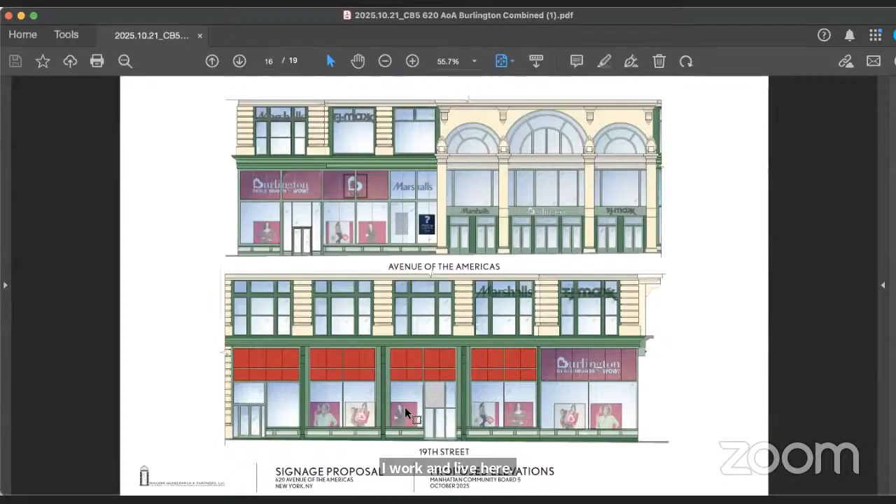Any comments? Correct me if I missed it. I don't remember hearing specific references in the Ladies Mile regarding light boxes, LED screens. I know that on other landmarks, LPC has approved them, but specifically this corridor and Ladies Mile, I can't think of any. Most of the big storefronts running up and down 6th Avenue have static signage, whether it's a film or their logo pushed back inside the glass. I think the LED screen, they actually did reference something on, I think it was Fifth Avenue. This will be a big change for this section of Ladies Mile.

I think the building is intense with signage already. That's why I was hoping the owners might be here, but it's just the applicant themselves for that space, to redo something, because that's how people know this building. It's the building with all the signage, and it's a lot.

I think the LED screens are probably going to be pretty distracting from the historic district. I agree that we want tenants here. Signage is normal, this is a shopping district, and there's lots of it, and there's going to be lots more. Burlington's got that bright red, it's pretty noticeable in general. I just think the light boxes are probably a little too much for this stretch of this particular part of Ladies Mile. I'd love to see them removed.

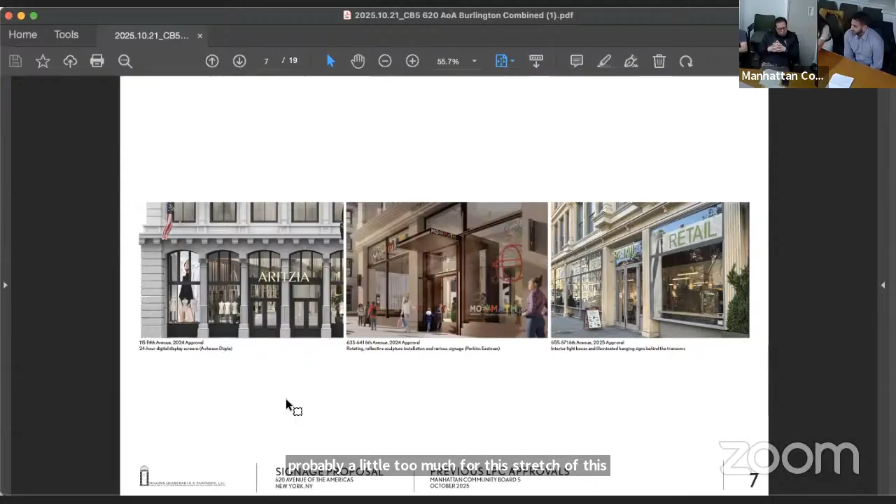Any other thoughts on that? Light boxes? I wanted to say two things. One is that we're landmarks, and this is a beautiful landmark building, and I know you guys honor that. We don't make decisions on real estate. So while we applaud the use of this space and you going in, and we hope every year is more successful than the next for this building, for the area, and for the city, we don't make our decisions based on real estate.

We make them on the fact that this is a landmark, and how are we honoring this landmark, how you're honoring it, and how we're honoring what goes on in Ladies Mile. What precedent has been set, what's allowed, and what will happen with this type of signage that you're suggesting, put in for your business reasons, which you've explained and we appreciate. I do like your installation in terms of creating the space around it, and we know you're trying to drive people in there. I think that it is excessive.

I am concerned as a person who actually lives in the Midtown area. The city is just grappling with this new technology moving forward. It's disruptive. After certain hours, for residents, whether it's a small or large residential community, it has to be taken into consideration, it just has to. We all are living on top of one another, and so the illumination is concerning, and the precedent that is set by the amount of this type of signage is greatly concerning to me. Although, believe me, I want to see you guys succeed, I really do. So I'm finding this challenging, but I find this excessive.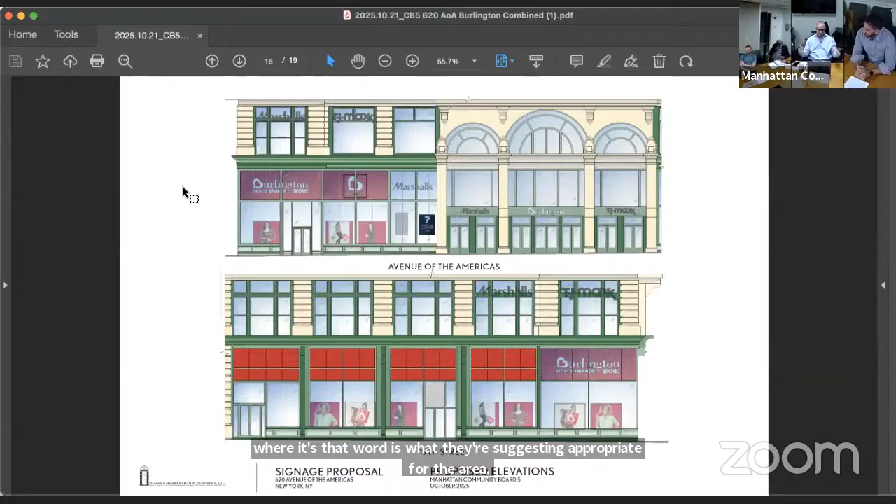Does it represent the area? Does it represent other buildings in the area? Does it represent what the building's been dealing with recently? The historical context of how the neighborhood has changed. Is it appropriate for what's going on? So I respect the comment, but yeah.

Again, I'm just saying, like 40,000 square feet, the pool of potential tenants is low. However, I will say that everybody in this room commented on the LED displays. I don't think anybody is making a big issue about the red or purple, but the boxes are a concern — how do we dim them down? And if there is going to be a resolution, it should state something about either having them dimmed, or maybe, as Tony says, have them completely removed.

I have a concern as well. I shared Tony's thoughts, just to show my hand. In the winter months, it gets dark at 5 o'clock or sooner, and that's several hours of bright red light sent onto the sidewalk. I get that this building is very commercial and has had lots of signage for decades, but it feels like this is taking it up a notch.

So, on the topic of the light boxes, I just want to echo what Tony and Suzanne said. Sixth Avenue is very different from the side streets. They're taking 14 light boxes and wrapping not only the corner of the building but marching them all the way down to the middle of the block on 19th Street. I think the side streets have a very residential character, and we should keep that in the Ladies Mile. The avenue is commercial, so — we're not the designers, but — I'd advocate it could be reduced from 14 down to something that just wraps the corner, maybe 5 or 7.

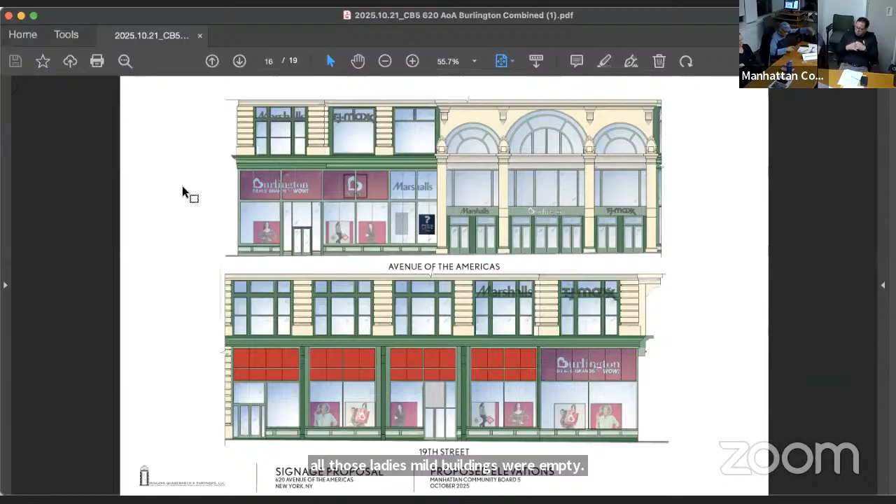However, I just want to add, the other day I was looking for an item of clothing as a gift for somebody, and I walked into the Burlington Coat Factory store across the street. I gotta tell you, the word schlock isn't in my dictionary - I probably never used that word before. But if this new store is not a 100% improvement from what's across the street that's withering and dying, it's gonna be a crime against one of the most magnificent buildings in all of New York City to put a schlock house like that in there. So I'm praying and hoping that the designers of the interior of this place will do better than what's currently there. I think that's about my whole comment. Thank you, Martin.

Let's comment some more. I don't know if this is realistic, but I'm guessing the aesthetics, the design language being introduced here is probably not unique to this location. If it's possible to see examples of other locations that maybe invoke what they're trying to do here, just to understand what that might look like - that could be valuable, because I feel like I'm using my imagination a lot. Maybe we all are. So if there are examples of this treatment elsewhere, that would be very helpful.

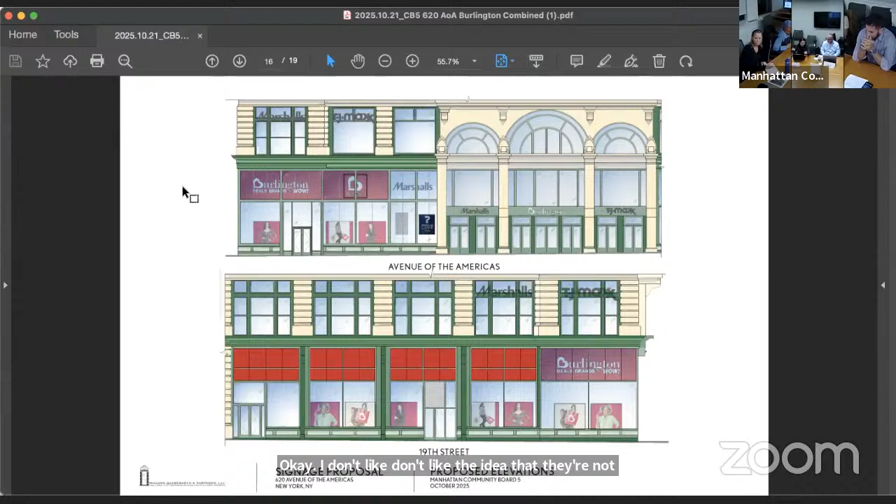I'm okay with that. I kind of don't like the idea that there aren't a lot of light boxes and LEDs on Sixth Avenue, and this might be precedent setting, but at the same time, I think I'd be supportive if we remove the light boxes off of 19th Street and have restricted hours and brightness for the remaining ones, to be responsive to some of the other concerns.

How do people feel about that? I'm good. Yeah, well, I was just looking on Google Street View and there are no LED screens on Sixth Avenue between 14th and 23rd Street in any storefronts. So this would be new, to the point. And whether we want to set that precedent versus - Burlington even has static signage at both Union Square and their current location. Okay, well, what do we make it, simple? I'd rather not set a precedent, because I don't think it's going to impact economic development or whatever. Let's see which way the wind's blowing here.

Motion for deny unless removal of the light boxes. Second.

Okay, alright, roll call - I'm going to go backwards this time. Testa, yes. Pedrazi, yes. Johnson, yes. I am a yes. Tuckman, no. No. Patel, yes. Pagan, no. Miatovich, yes. Kback, yes. Harris, yes. Briz, yes. Klein, yes. Burstein.

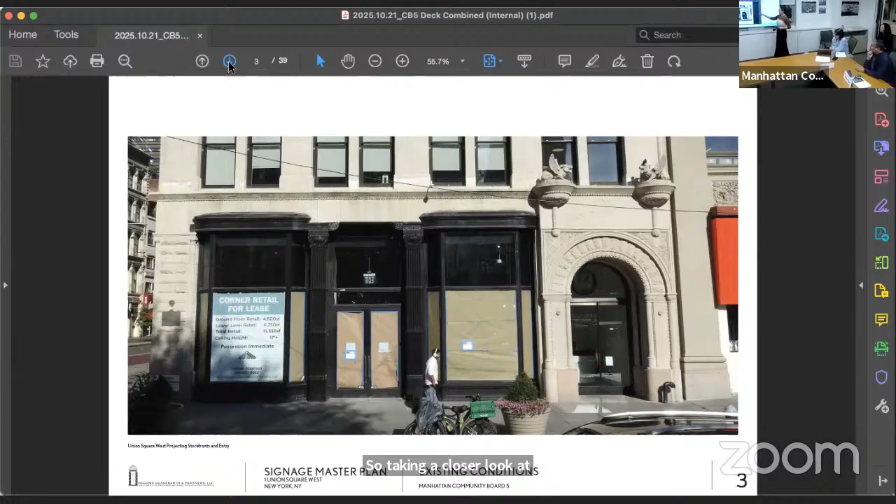Taking a closer look at the 1 Union Square West elevation, the main building entrance was just restored as part of a larger facade repair and restoration scope, including the full window replacement job. Most of the building has now been addressed and lovingly restored, so getting a tenant into the ground floor is really the new focus and the most important next step.

Designing a signage master plan that makes sense for an incoming tenant is our goal. We have two projecting storefront bays on the Union Square West facade, and the main retail entrance is tucked in here—a recessed entrance with double doors, a thin glazed transom band, and a larger transom above. One of the biggest challenges with this space is that the retail entrance is very recessive; it's actually hard to find your way into the space.

Our proposal includes some more prominent signage, particularly at this entrance, to create more of a draw and wayfinding identification for a future tenant, while still allowing the historic entrance portal to remain the most significant aspect of the facade. On 14th Street, we have a couple of different signage infill types: a single projecting bay at the corner, and more of this typical rectilinear infill along the rest of the 14th Street elevation.

Cast iron lintels, very simple storefront framing. Again, all this infill is non-historic, so any attachments we would be making into the storefront infill are not impacting any historic fabric.

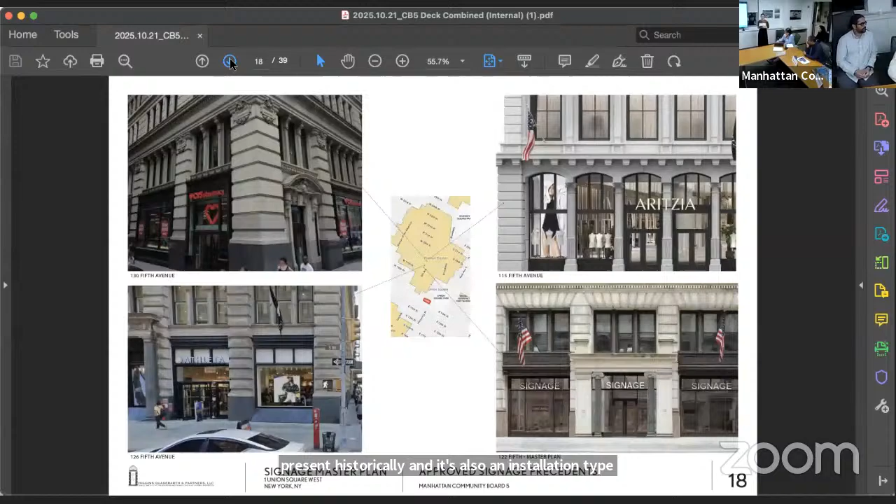As I mentioned, the construction of 1 Union Square West is very much tied to the development of the larger Ladies Mile Historic District. So we were also taking a look at what was being approved, particularly on 5th Avenue, with similar building types and scales. We've seen LPC approve a range of signage, including illuminated signage on the exterior of buildings, the installation of flagpoles, interior illuminated signage for storefronts, and also tenant-driven fonts and colors being utilized. That's also something we have integrated into our proposal to provide a sufficient amount of flexibility.

Getting into the design proposal, as I mentioned, there are 2 separate retail spaces included in this master plan. The main retail space, which we're calling retail space 1, is the ground floor, accessed from Union Square West. This additional door is just an egress door, so that's not going to be a main entrance door. This is the main entrance, and our proposal really does consider that and wanting to make sure that it's visible. The basement retail space is located in this bay on 14th Street, which leads to the basement. We are including that bay in this master plan.

So looking at the elevations, because this is a master plan, we are showing a possible way that a tenant could install signage. But what you are going to see in these elevations, we have 3 elevations, is the maximum amount of signage that could be installed. That includes the various signage types that are possible under the master plan.

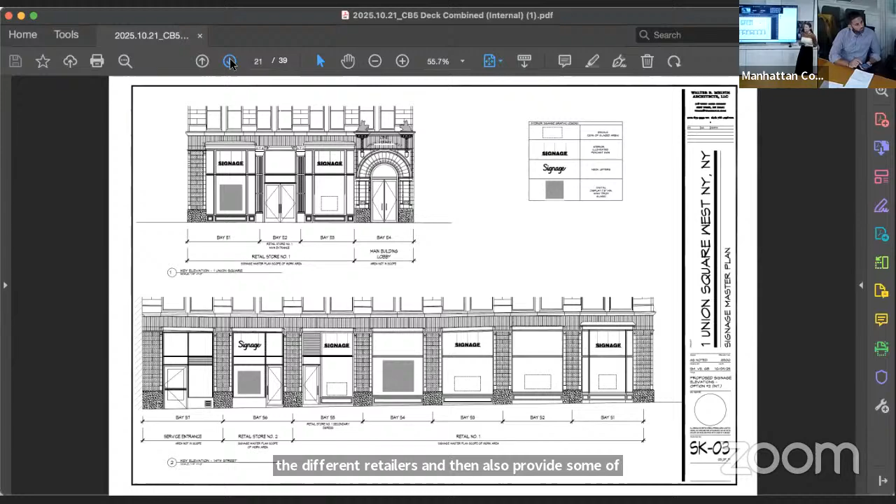This is just showing the interior signage options. All of these signage options—suspended illuminated signage, interior neon signage, digital displays—would be set back. The interior signage suspended at the transoms would be set back 12 inches from the glazing. The digital display screens would be set back 18 inches, and the parameters for those would meet staff level rules.

I want to clarify, because this came up with the last application, that LPC staff can actually approve digital displays. They regulate them as part of their interior partition rules, so it is something staff can approve. They do approve one-off installations, and a lot of these applications are coming before the commission because the cumulative amount of them, or the size of them, is actually exceeding what staff can approve.

We're also providing some example areas where decal signage could be installed on the windows. Again, a very typical signage type that we see throughout the district.

The following elevation shows the combined exterior and interior signage—this is actually what you were seeing in the rendering. We are providing for a couple of different signage types within each window. The scale of these storefronts is actually quite large. We can flip back to some photos at the beginning of the deck if anyone's interested, but when you see the pedestrian scale in relation to the storefronts, there's a lot of glazing here. We're going to maintain a lot of visibility, but particularly on this corner and in this area, having this amount of signage is very important.

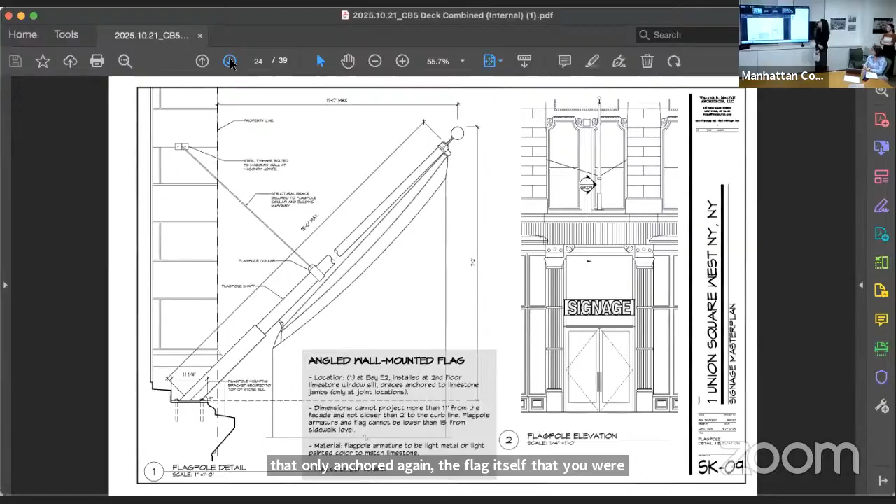These are the dimensional letters raceway. At the sign band, it could be either a raceway or over a flat panel. The color of the raceway supporting the dimensional letters will again match the limestone. These whole spandrels are new limestone that we just replaced, so we don't want the signage to impact that—we're specifying they should be anchored at vertical joint locations. The size is all matching per LPC rules, so the dimensional letters should be 18 inches maximum in height, and for the length of the signage, we are specifying that they should match the width of the storefront.

Then there's a possibility that they can do these dimensional letters on the transom bar. So we're proposing a flat bent plate that will be anchored either at the steel transom bar, or at store number 2, which is a wood storefront framing and is shorter.

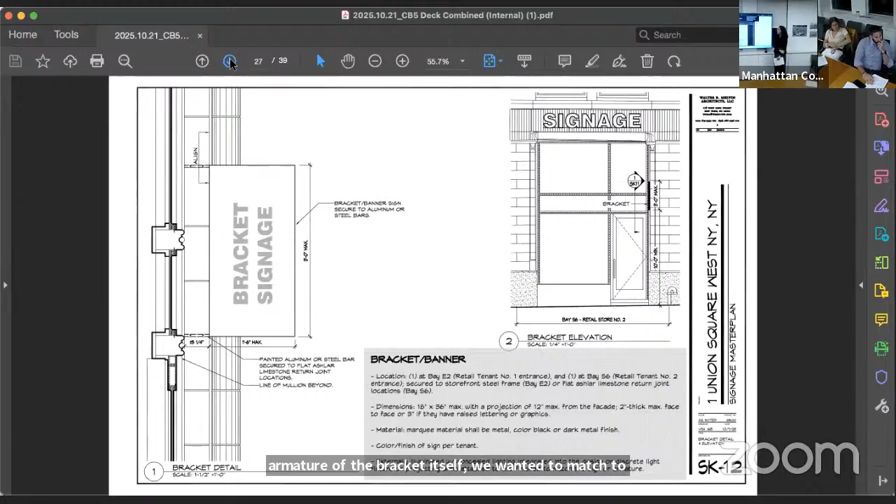These are the interior signs, so these will be the digital display screens. We are letting tenant number 1 have 2 screens, one at Union Square side and one at 14th Street, but with the parameter that they cannot be adjacent. So at the corner, they cannot have both corners with the digital screen. It would be set back 18 inches per LPC rules, 75% of the width of the glazing and 50% of the area of the display window. It cannot be located on the transom window.

These are the interior illuminated pendant signs. We're proposing 12 inches behind the glazing, and this will be located only at the transoms.

Finally, the decal signs can be located either at the lower display window or at the transom window, but not two decal types on the same bay, so it would be either or. These are 20% of the area of the glazing, also following policy rules.

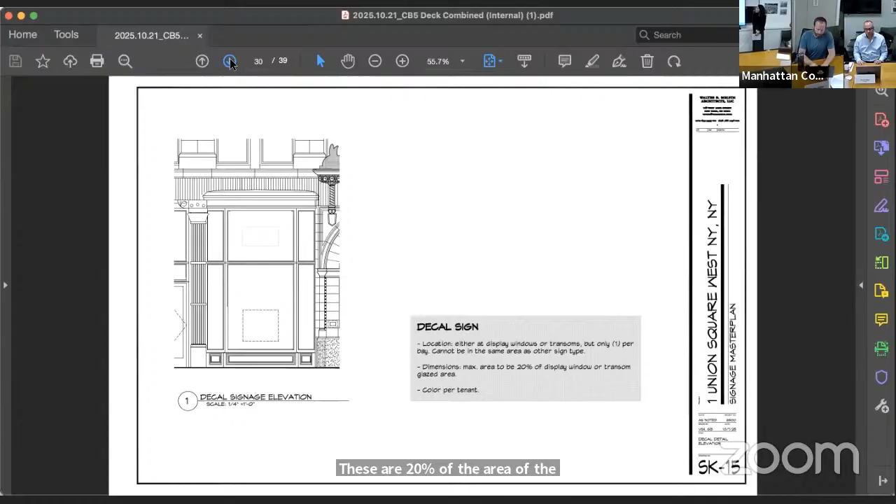This is just for reference that we went through each of the types of signage. We are giving a parameter for everything we mentioned, color, finish, etc. This is also attached to the deck for you.

Just to wrap up, what we're showing here are all the different signage types that Gabby just took you through. This is the zoom in to the base of 1 Union Square West. Again, really trying to find a nice balance between exterior and interior signage, and then creating more of a soft illuminated glow for that exterior signage with external illumination.

If you go to the next slide, we have a wider view showing the adjacent context, especially in relation to adjacent retailers that are not landmarked. Again, trying to find a balance here of what's appropriate to the individual landmark, but also fits into the surrounding context in this particular location. So we're happy to answer any questions you have.

Great, thank you very much. For the benefit of the new members, this might be our first signage master plan we've seen in a little while. Just so you know, we're not voting on a particular retail business to go in here, but more we're voting on a theme, like an overall system to be a permanent theme for this space. The benefit is that it ensures consistency over long periods of time, and for any future applications it just speeds up the process. They can go through staff for most of LPC's requirements, they don't have to come back to us again. This is our chance to review the signage, no matter what, forever and ever. So that's what we're looking at here, that's why it doesn't say Burlington or whatever brand that might go in there one day.

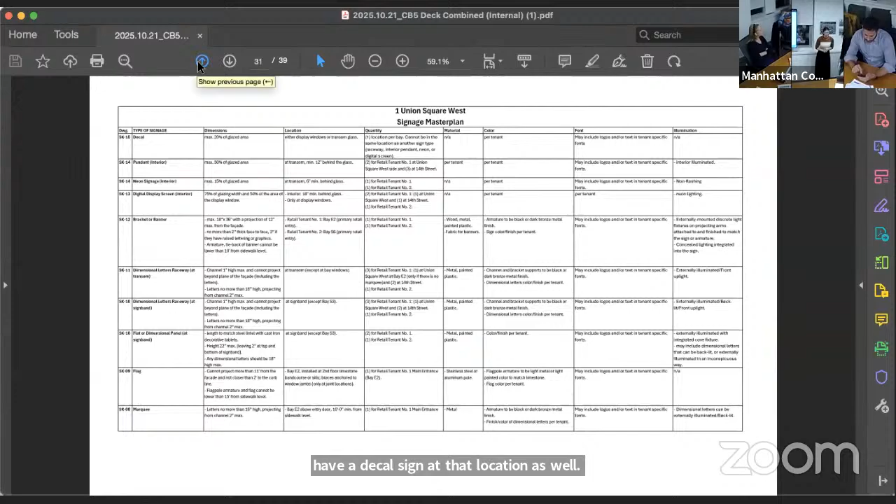So if you get a display screen, you will not be able to have a decal sign at that location as well. Can you show me what you mean by that? Decal sign, we didn't render a decal. It's signage applied to the glazing, so there wouldn't be competing signage at that area.

It should be like, which is 20% of the glazing area, so these have been like a vinyl applied to the glazing. So vinyl, they cannot have that with the screen, there's only a maximum. Any additional signage would be in the transom if there's additional signage.

Part of why we're including it in this proposal is because we are seeing a lot of retailers interested in these screens, and it was very important to include that as an option in the master plan. Again, it is a signage type that staff can approve, so we're meeting the parameters outlined in the staff rules for those types of screens. Thank you.

Last question? Yeah, John. Just for my own clarification, when we talk about digital signs, does that include signs with a lot of animation?

You could have a person jumping up and down, or blinking lights. Sure, so the digital LED screens could include static or moving content. And again, that's consistent with staff, they don't regulate content. That can go 24 hours a day.

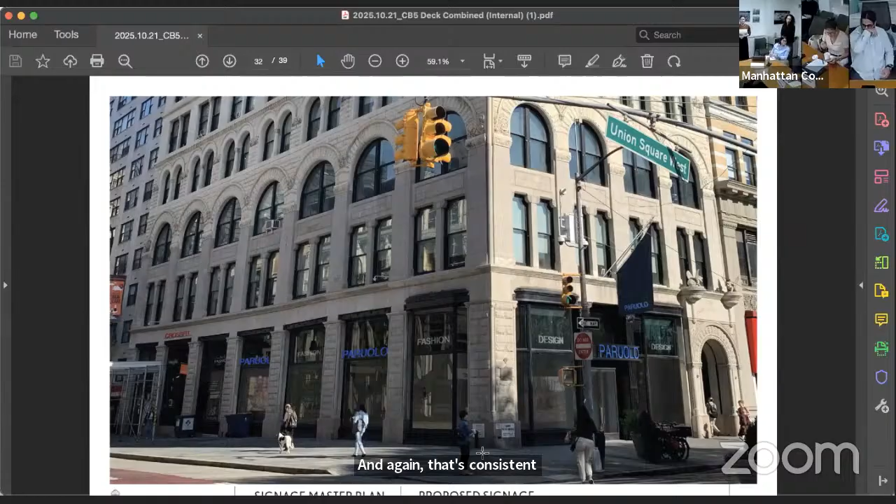Technically, and the commission has been approving that in the Ladies' Mile Historic District. But again, it would be per tenant, and that's not something we are regulating as part of this master plan. It's not regulated by the hours of operation of the building, it would not be.

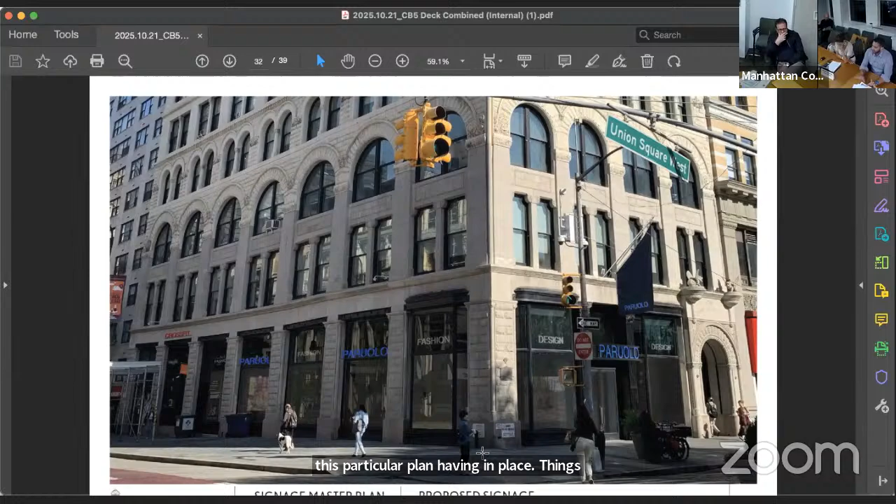So it comes down to our comfort level of the owner and this particular plan having in place things that allow for flexibility of a tenant being able to rent a space, making a tenant feel comfortable, getting the word out that we're here, but also making sure that it's not Times Square as far as signage goes. So it sounds like they have those safeties in place. I hope they stick to it and they maintain it. That's kind of our hope with these things, is we don't ever know for sure, but we're relying on them.

Further comments? I have a comment. I think the digital display is very similar to what we just saw in the previous application, so I think we need to discuss how we would apply what we just declined or denied on the previous application and now address it in this application.

So they're proposing that if all the retailers were to select up to 3, and the sizes -- they didn't give the size, but they give it graphically. So would we be okay with the 3 digital displays, or are we going to say deny unless, like we did the previous one?

So yeah, I think to that point, overall I agree with what's been said, that it's a very thoughtful plan related to display. I know the check and balance is kind of like the decal in front of it, but it does feel like that's something no one would ever do anyway, so I'm not sure if that's that robust of a consideration.